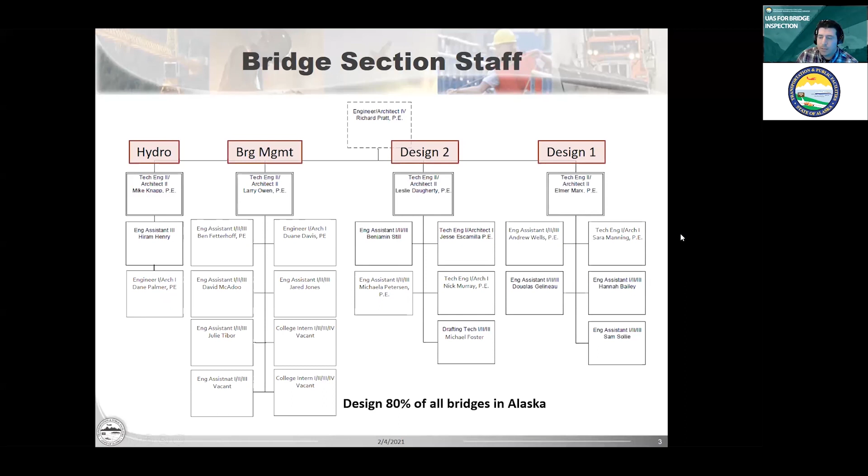Our staff of about 20 engineers is pretty diversified. We're broken into a couple of sections: 2 design squads, a bridge management squad, and a hydraulic squad. Although we are in squads in a sense, we do a lot of work sharing. For instance, our designers will also perform load ratings and inspections, and bridge management will also do designs. We have a lot of well-trained engineers in that sense. We consider ourselves a production office. We design roughly 80% of all bridges in Alaska, whether they're new bridges, rehabilitations, or preventative maintenance - 80% of those get pumped out of our office in the state.

So in the summer months, we do turn our inspection hats on. These are our routine inspection team leaders, and that goes all the way up to the top to our squad leaders and our chief bridge engineer. Each of us will have at least one routine inspection trip, which is pretty uncommon I think for chief bridge engineers to be out with a hammer banging on concrete bridges. It's something we all take pride in. In fact, we perform 100% of all routine bridge inspections in the state - it's handled through our office.

Segueing into fracture criticals, we have a lower number of team leaders, although all the routine inspection leaders are capable of doing it. For logistical reasons, we reduce those numbers, and we perform 90% of those as well in-house. We limit the rope access and specialty climbing ones, but anything we can access with a lift or under-bridge inspection truck is what we typically will inspect.

So let's look at our bridge inventory and our highway system. We don't have a lot of highway that covers a lot of our state, as you can imagine. A lot of it is non-redundant or critical - if we did, through an extreme event, lose a bridge, we would have detours that could be hundreds of miles, or potentially there would be no alternate route. Like on the Dalton Highway, there is only one road that goes in or out.

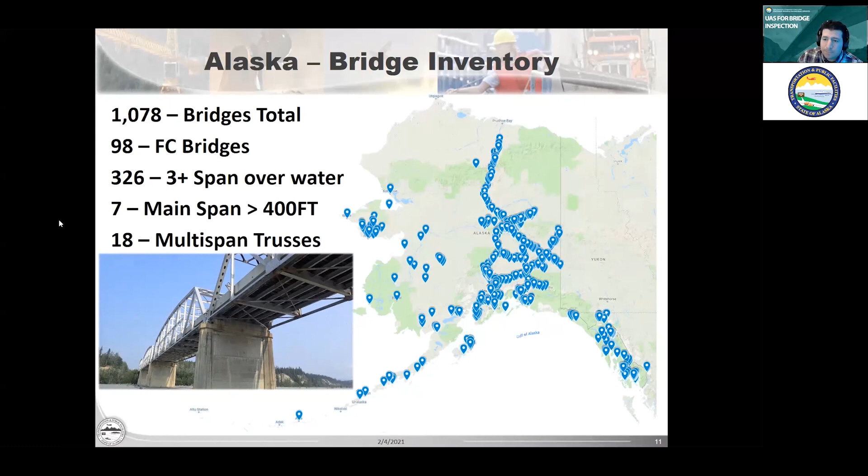So why are we looking at including unmanned aircraft into our inspections? Well, to supplement our routines, our in-depths, low waters, and fracture criticals. Obviously, they're not going to replace hands-on inspection, but we do look at other elements when we're in our trucks. So in that sense, maybe we can expedite our inspection trips.

We're one of few states that, on our routine inspections, don't typically lower underbridge inspection trucks. We perform routine inspections from the ground level with binoculars and spotting scopes to assess spans we don't have access to, using engineering judgment and what we can see visually. If we do have to see more, we flag it and get a special inspection to come through at some later point.

But you can imagine this can get complex on some of our longer span trusses or deck trusses where access is definitely very limited to just this slope that leads up to the first span.

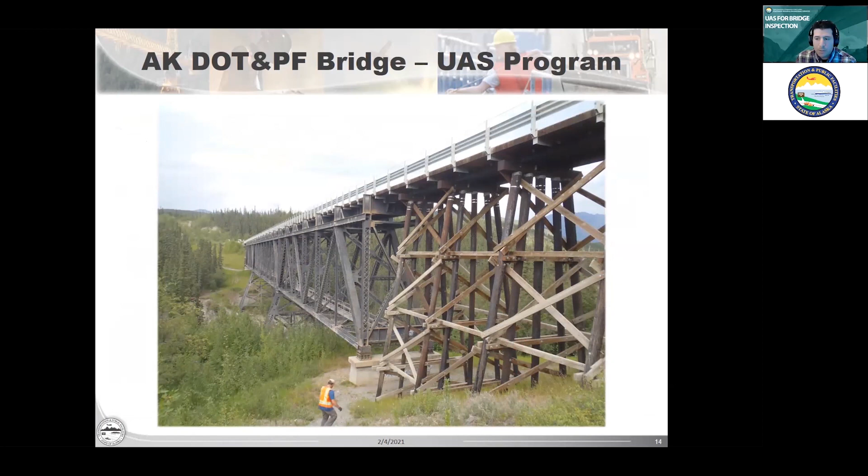Another reason we're looking at including aircraft is inspector safety. That affects me greatly. As you all know, being on a bridge deck with traffic adjacent to you isn't great. The more time I can spend off the bridge deck with variables we can't control, the better. So if we can inspect certain elements and not be on the bridge deck, I think that's a win-win.

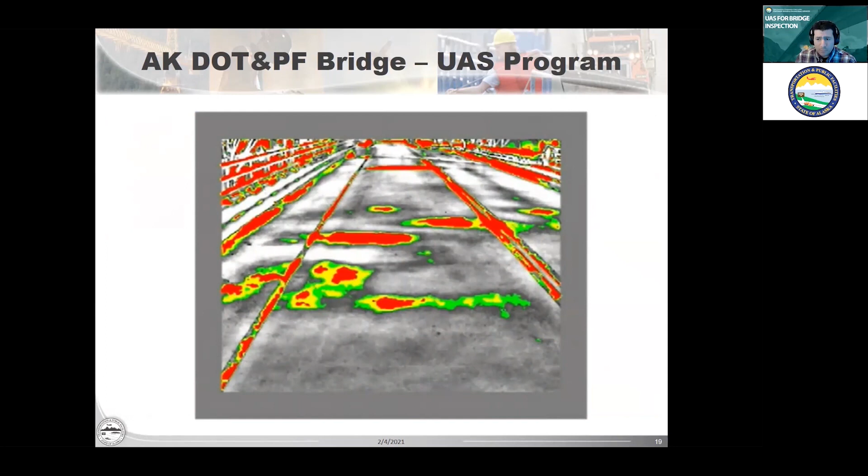Obviously, there's advancements in technology. Drone technology has increased rapidly. As tried and true as chain dragging is, it requires you to be on a bridge deck, chalking out and estimating areas of delaminations and spalls. But through thermal technology, we can now use drones with FLIR cameras to take pictures, images, and videos of areas like this. Whether it's full AI autonomous calculating the areas internally, or taking pictures into AutoCAD or MicroStation and measuring areas, there are obviously alternative ways to do this.

And we have had a slew of emergency inspections as of recently. I am going to make some changes in my settings for one second, I do have a video coming up.

But aside from obviously taking really cool aerial photos, what may we have potentially had to do, or what may we do with UAS if needed? Well, the bulk of our bridge inventory, our modern bridges, use steel pipe piles that are encased, concrete filled steel pipe piles.

Sorry, hard to get that out. We do that because they're really ductile, they allow a lot of movement in seismic situations. Imagine if this bridge was pushed on transversely, left and right. We get that ductility, great, but what we do at the top is stop our piles short from being embedded into the piers. As you can see in this photo, that top gap is about 3 inches.

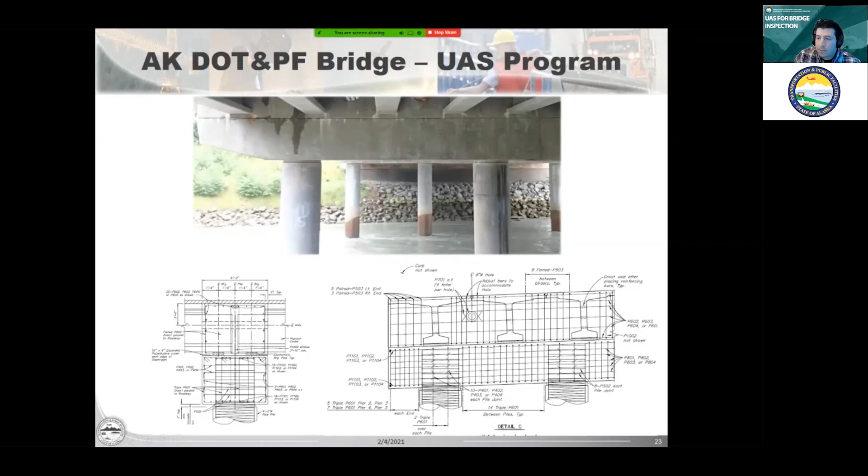We've also had a number of bridge strikes recently. Pay attention to the roadway down here as you'll see a bridge strike coming from webcam footage. So this was a dump truck that came in with its bed up, slamming into the side of the bridge. This is Dowling Road over the Seward Highway in Anchorage, and I'll play it one more time if you missed it. An impressive impact with that.

We had another event that happened on Artillery Road over the Glenn Highway. This is just north of Anchorage in Eagle River, where a truck carrying a Connex box got sardine canned and the top ripped off, damaging the girder. In both instances the girders had to be replaced, and traffic was diverted because of the unstable girder that could potentially have collapsed. So for inspecting, anything we can do to not be directly underneath what is unstable is an added benefit to us.

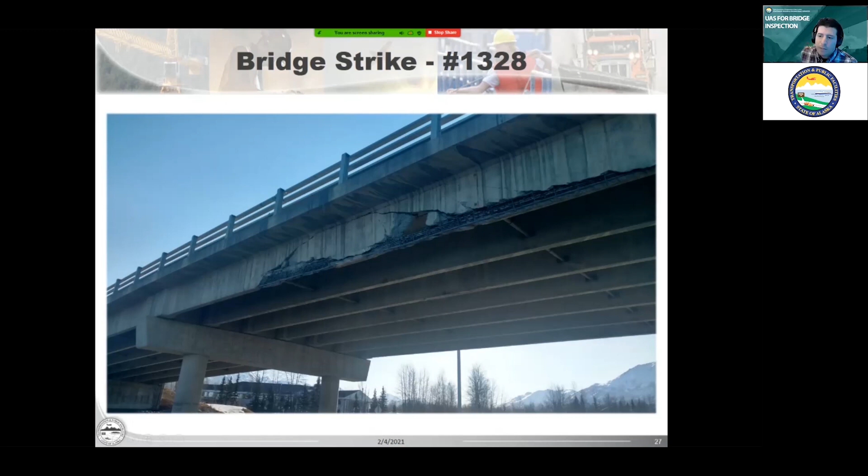So one more example of a bridge strike. This is a tall bridge, the Juneau-Douglas Bridge in Juneau, connecting Juneau on the near end and Douglas on the far end. And you're probably thinking, well, this is a tall bridge over water, what could possibly hit this, right? Well, I give you the ingenuity that is a crane on top of a barge, pushed by a tug.

That actually happened, and what's great is cell phone video coverage that pops up on Facebook is how we find out about events such as this. This was an excellent study.

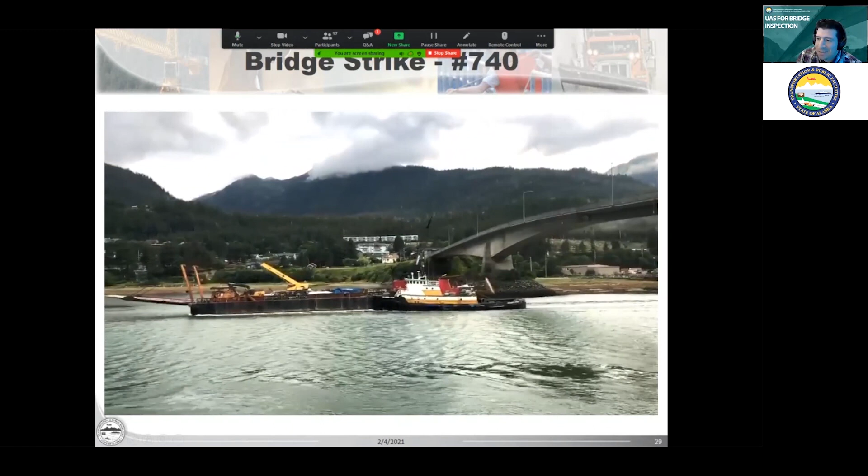This was a study for UAS inspecting because we had just started talking about implementing these into our inspection workflow, and this was while COVID was going on. This was actually one of the first times I saw coworkers in some time since we quarantined. So I was tasked the next day with investigating the damage and assessing it in a detailed manner. With our typical way using binoculars and spotting scopes, it's hard to get up and see where the damage location was, even at low tide.

We utilized our trade secret trick of GoPro on a stick to access and visually see the damage, which you can sort of see at the bottom here. But even then, our first attempt showed the damage, but it wasn't great. The GoPro was too wide angle of an image from this long overhang to actually get the visual.

It actually required a trip to Home Depot to get some rigid metal conduit to fashion into an L shape - a vertical leg and an elbow and a horizontal leg - then attaching the GoPro. So we've updated that refined technology, and it did give us the visual.

However, had we had an aircraft in our inventory, what took 4 hours would have been a quick deploy, take some images, and we're done. Because all I was after was an image like this that I could quantify the damage with, to ensure there were no bars exposed, no pre-stressing strands or ducts that were ruptured.

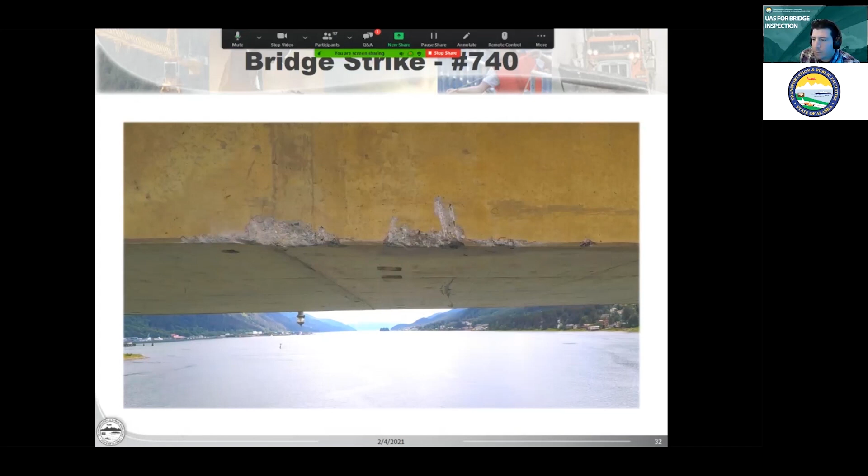So being able to visualize these from a safe distance is something that we'd really like to have in our inventory.

So where are we at in our UAS program? In April of 2020, just recently, we were awarded a $100,000 STIC grant. For our little bridge office that we maintain, that's enough to kickstart us. We've procured 2 Skydio platforms that I envision to be our workhorses - they're going to do the bulk of our flying for day-to-day inspections. We also have 1 DJI Matrice 300 with optical zoom, thermal sensors, and a spotlight for specialty inspections or nighttime inspections if need be.

3 of our inspectors who go on our inspection trips will shortly take their Part 107 exam. Mine is planned for next week, and 2 others very shortly. This summer in 2021, we're going to start implementing them on select bridges that we're assigned to - like that list I showed earlier, possibly longer span routine inspections, multi-span routines, or fracture critical aids.

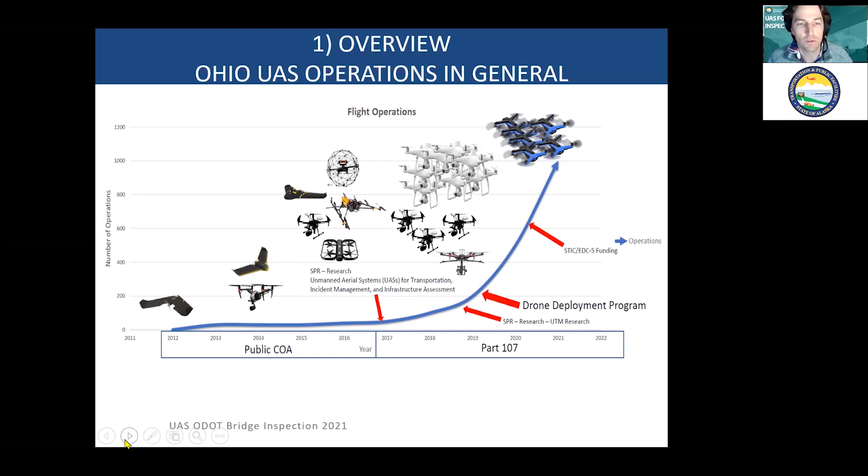In the bridge inspection world, once the Skydio 2s came out, we just used them. We like the Skydio 2s, we don't get paid to say that, it's just a drone that is working for us. And we expect the same type of curve with bridge inspection to take off with the Skydio 2s.

As background for Ohio bridges, we have a bunch of bridges. We are a home rule state, meaning the more local or regional you get, the more authority that local entity has. So we have different jurisdictions: state highways and interstates, the turnpike, our publicly elected county engineers, our professional engineers, our mayors. You can see how many cities we have with bridges, how many bridges total.

We have 45,000 structures that are considered bridges in the state of Ohio. Not all of those meet the definition of an NBIS structure; if you're looking for the bridges that meet the NBIS structure, it's this number, 28,596. So we have a lot of bridges, but let me drill down just for the state structures.

We have 12 districts, and we deem the bridge engineer of the district the responsible person, the responsible charge. The bridge inspection happens out of their shop, and there are 14,552 state bridges. Looking at boiling it down even more, we have an underbridge inspection truck—actually two underbridge inspection trucks—and that's an operation that's centralized.

We very simply divide the state in half. We have a northern U-bit and a southern U-bit. We call them snoopers, but they're technically Aspen aerials, and they do 400 bridges a year. That's the process we're trying to knit into our normal supplement to the snooper operation.

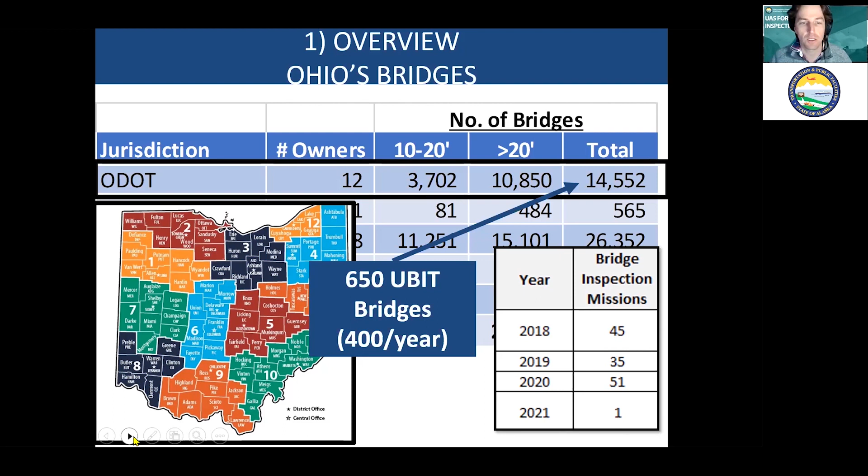We started using drones and bridge inspection for our major structures, and this is one of our big cable stays in Toledo. Where we see benefit right off the bat is, if we're going to rappel this tower and rappel out the cable stays, using a flying camera is a much safer way to do that.

We can get similar video. We might not be able to get a close-up of a crack indication or something very minute, but this could be the first envelope of inspection. A drone inspection could be the first envelope, and drone pilots get distracted - apparently this pilot was into boats. Okay, back on track now.

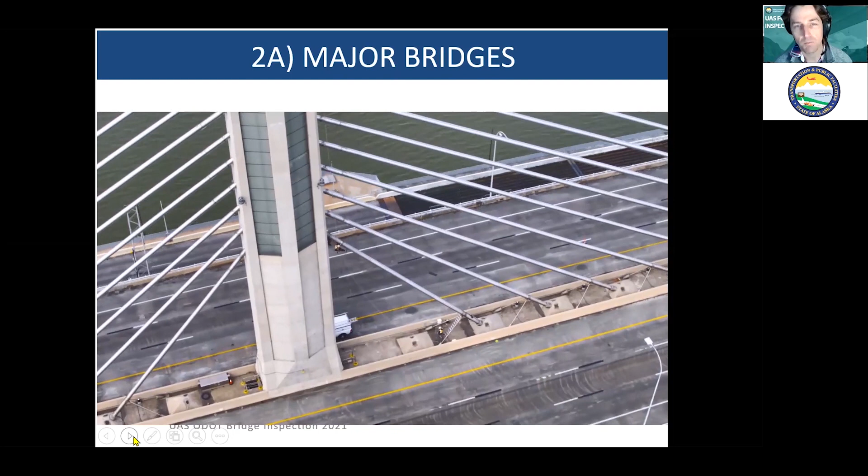You can see how dangerous this climbing can be. We anticipate using the drone instead of climbing every 5 years, perhaps using the drone to offset climbing to a 10-year cycle. More major bridge stuff.

This is a drone of our snooper. We have ongoing research with the University of Cincinnati on this structure in particular - it's the Jeremiah Morrow Bridge near Cincinnati. We want to get a set flight path that takes video or photo of every single square foot of this bridge, and it will automatically find crack width, crack length, and determine if there's growth or change over time. So we have ongoing research there with UC, and that's happening.

So that was kind of the major bridges - that's where we started with drones. Where we moved then into using drones more often as the reactive approach. We fortunately have 4 team leaders in our central office that run and manage our underbridge inspection truck operations.

Again, we do about 400 bridges every year. We schedule them ahead of time, and then we go implement the schedule. Well, when we show up to a bridge, often there's construction, or bad weather, or COVID. A global pandemic can take out a whole garage of traffic control. So when that happens, usually we just do the inspections from the ground.

But in 2020, instead of using the snooper, we were able to use the U-bit, or use the drone, and basically offset the snooper days. So we're reacting to our normal operation and finding value there with 39 inspections.

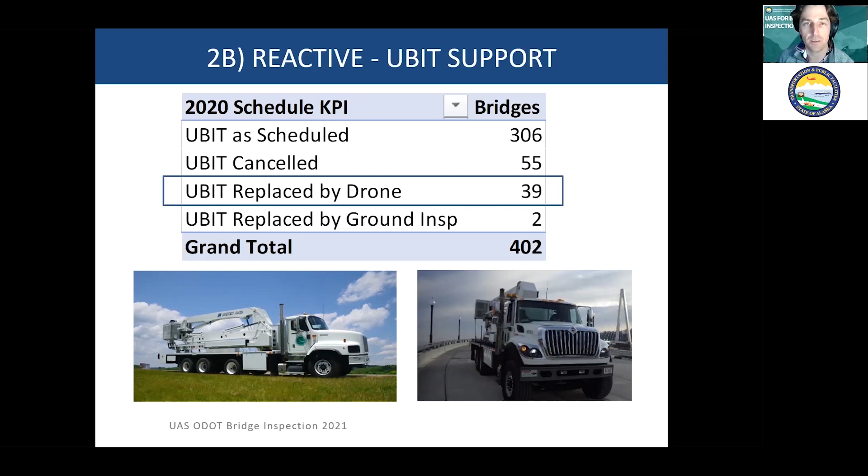Another value we found - we have some structures like this interstate ramp with the blue dashed line that has such super elevation and such high ADT that you can't close it. You just can't close it for one, and you can't put a snooper on it for two. No matter how hard we tried, we just could not snooper this bridge. So using the drone was really the only way we could get close up and look for those out-of-plane bending cracks, close up inspection for crushing.

Little closer than from the ground. Our general rule of thumb is if you can't get within 35 foot, you should probably put it on the snooper list, and you should schedule it every year, every 5 years, somewhere in between. But we're seeing that we could do that with the drone - we could use the same policy with the drone. 35-foot sight distance could apply to a drone as well.

So another success story we had - Kentucky found some indications, some fatigue cracks on their approach spans, and we wanted to look at the same detail on the Ohio approach spans, but we could not get a snooper in there because of construction.

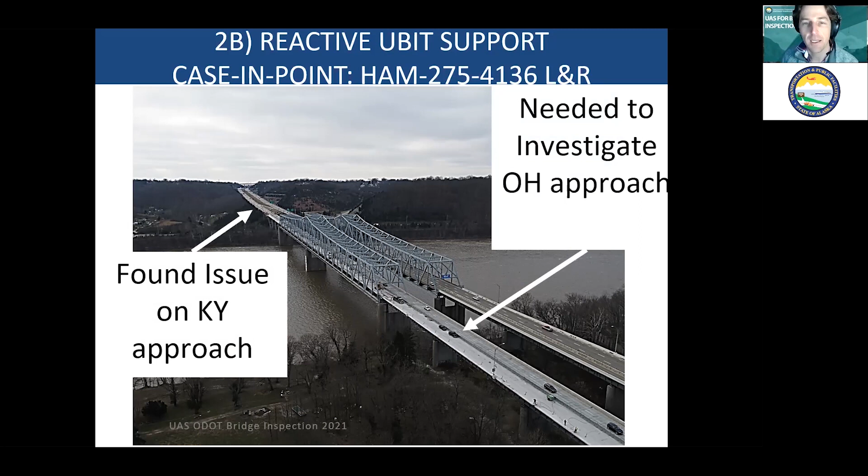It was interstate, and fortunately we were able to bring the drone in, and it was able to zoom into those cope holes and do an inspection for fatigue cracks. We could get close enough to inspect for fatigue cracks. So another win for the drone.

Once we had the three wins I just shared with you, I was convinced there was a spot for drones. So once we did that, we started asking inspectors if they'd be interested in being pilots. We have two central office employees that are pilots who run our snooper operation.

Another example of an interstate bridge that was canceled is this one. Notice that there are a number of interior spans that you simply can't get into from the ground. Using the drone was very helpful because the alternative is just kind of a sorry inspection. Here are the pilots. The drone was able to get to this seated hinge, a number of spans away from the bank, and do an up close inspection.

A benefit there. Another place we reacted was we got a phone call from our permits office. They said we had a super load drive on this bridge, off permit, and they heard a popping sound. Can you send the snooper truck and do an inspection for fatigue cracks, buckling, bearing movement? And we had the question - if a super load caused popping, our snooper truck is pretty heavy. It's a permit vehicle. It doesn't make sense to put a heavy snooper truck on a bridge that might be buckled. So it's another win for the drone.

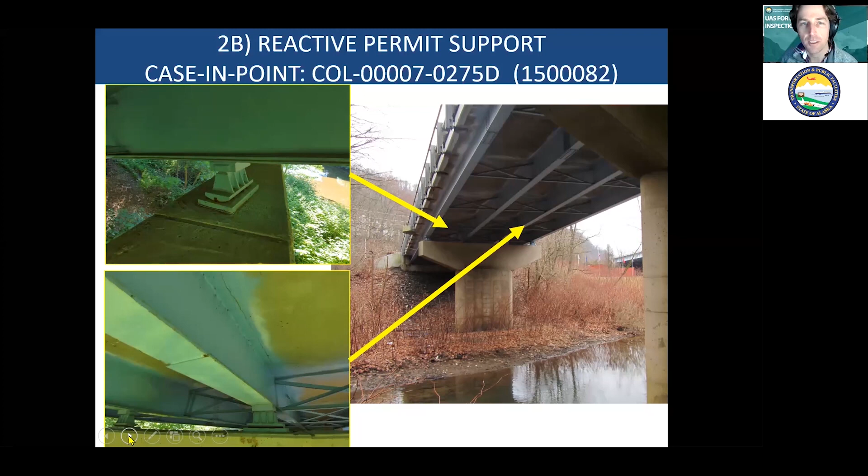We were able to fly the drone in and around, even in between the beams up close to the deck, to look for fatigue cracks on those fatigue prone details and inspect all the bearings. There weren't any fatigue cracks or buckling on the bridge. Another win.

We're trying to be proactive with the drones, so we added a drone inventory field, yes or no, with a frequency and an inspection date. We're attempting to be proactive. We're not quite there yet.

Some places we are currently proactive is with known issues. The snooper has found issues, corrosion holes like this. Instead of using the snooper every year, we can use the snooper every third year or every fifth year. And in the intermediate years, we can fly the drone up to a known issue and see if there's any change. So that's one way we're being proactive.

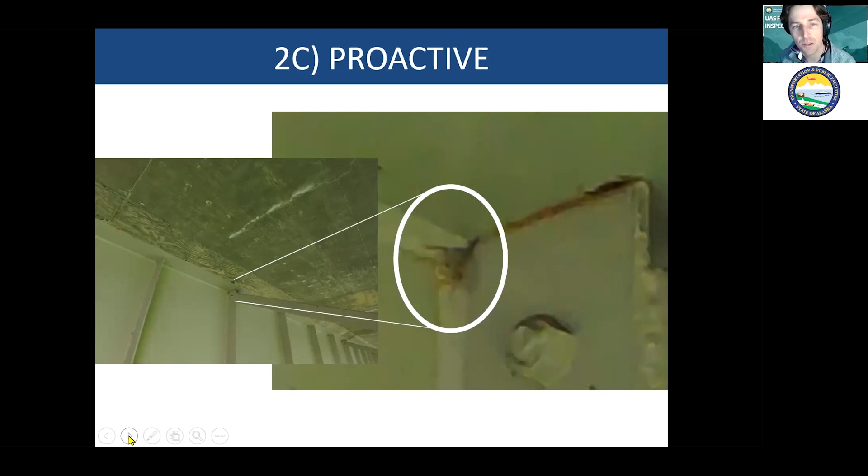Another way, similar to the section loss I just showed on the last slide, is fatigue cracking. We have a fatigue crack here, or an out-of-plane bending crack, that we found during a normal inspection with the snooper. We can follow up to that known problem area with the drone and see if there's any change, any growth. So we're trying to be more proactive.

We found with project scoping benefit, the drone will go up and do photogrammetry and determine how long the approach slab bumps are and determine what type of project we should do for big, long projects. We can also get close on bearings, replace or rehab, and we can look at structural steel section loss and or cracking for scoping.

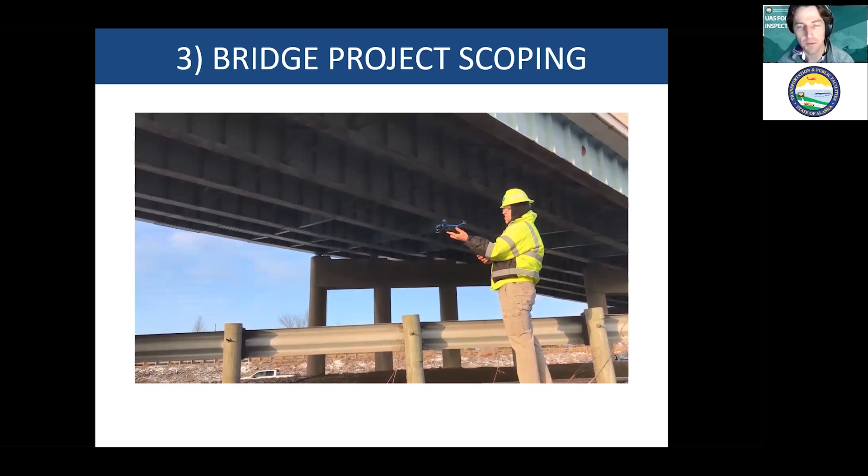I'm going to show a video. This is Dan, one of the two bridge snooper operators, team leaders, flying the Skydio 2. Notice he's holding the Skydio, turning it on, and flying it up to the pier. We're going to be pretty close to traffic here.

Some of you might cringe, but what we're looking for - Dan was charged with looking at the forward and rear face of each bearing. I think there were 6 or 7 beams and 6 or 7 piers. He flew the Skydio 2 on the forward face and took a photo of every single bearing. There it is, and it didn't move. You really can't crash these things.

And then he did a photo on the rear face of every bearing. Super cold this day - this was just a couple weeks ago. And it just took two batteries to do it.

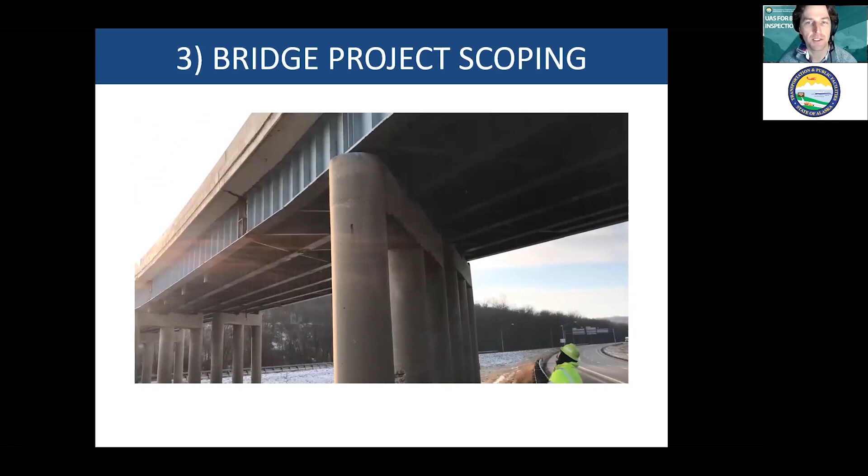Yes, we could have done a ladder. We couldn't have done a bucket truck, and we didn't want to do a snooper truck. This was the best method for doing it. He was done in less than 30 minutes taking photos, and then processing the photos took another hour and a half or so, organizing the photos. But it gave us what we wanted.

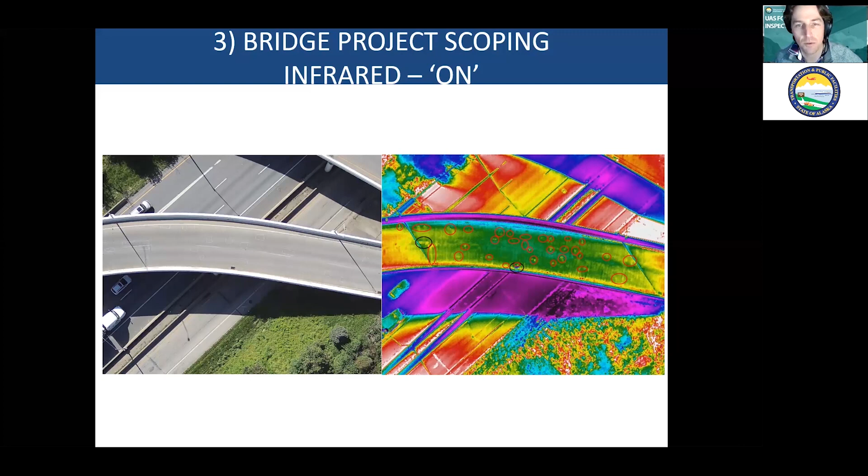Infrared, I'm not a big fan of infrared yet. We haven't seen a huge benefit. Where we have seen benefit is where we close down traffic and spray paint the wearing surface, then do a drone imagery on top and measure them all together. You can see some of the spray paint squares in the left-hand image. Infrared, not a big fan of infrared on or infrared under. It's not really telling me anything yet that you can't see visually. So you can see a lot of the issues visually.

We used a drone to make a 3D imagery of the super span culvert, corrugated metal pipe, to see how much corrosion we have through the pipe. That was kind of cool. I'll skip through some of this, but we have found benefit where we're looking for workmanship issues.

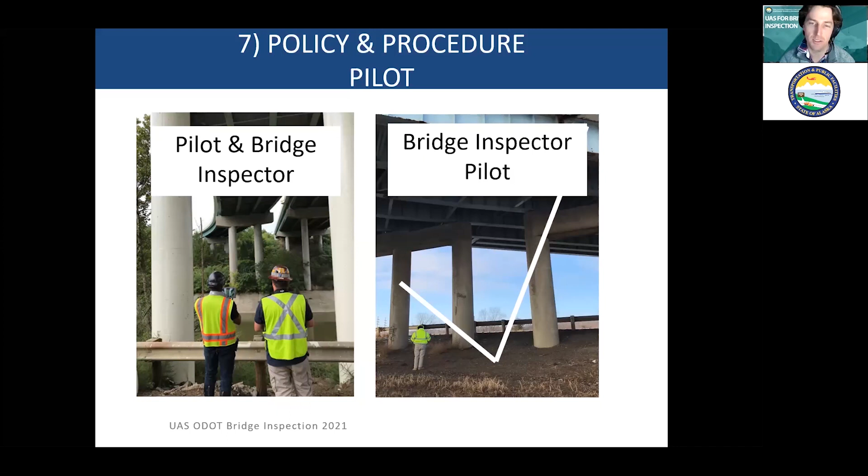Probably the biggest benefit, or the biggest turn for us, was instead of going from a two-person pilot and bridge inspector operation, which was what we have on the left, we have the bridge inspector on the left and the pilot on the right. What we found was, and this is very simple, and we overlooked it, I overlooked it, the inspector would tell the pilot, go ahead and fly to cross frame 4, it's bay 3, span 2. They would look at the inspector and say, what? What's a cross frame? So there was so much of that happening that you'd lose your battery life. You'd have 15 minutes of battery. So that was enough of an obstacle for us to just train a bridge inspector to be a pilot under the Part 107 rules. Instead of the pilot being trained to be a bridge inspector, it was just simpler to go the other way. So once we did that, we found great value.

A couple of other things, we use Skyward. I highly recommend Skyward. It makes planning the operation very simple. There's a built-in risk assessment, about 45, 50 check boxes where you go yes, no, yes, no. For example, have you flown within the last 30 days? If the answer is no, you're a higher risk as a pilot. So we've made all these risk assessments for the pilot to easily plan their operation.

Recommend that. And I mentioned that we went from the pilot inspector business model to just the inspector being the pilot business model. There's an onboarding that has to happen. Once somebody passes the Part 107, we know they are legit. We know that they're interested.

So then we give them 2 days of training at the UAS Center, and then they have 3 hours minimum using the Phantom 4 Pro, which is a little more of a twitchy, more difficult drone to fly. And then they have 10 hours of solo time, and then they need to record flights every 30 days in order to keep their drone.

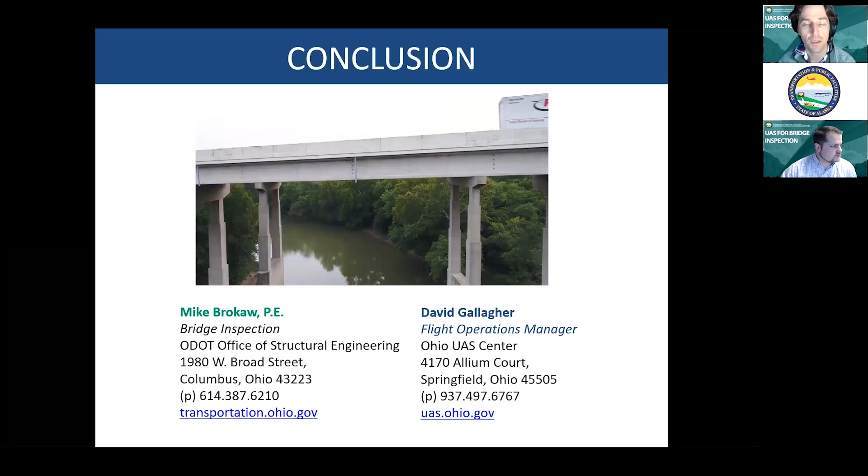I think if you find a place where you can knit drone usage into your current operation, find something that's working and knit it into that operation, then do so. We are knitting it into our snooper operation, as I mentioned, and I don't get paid by Skydio, but once we got the Skydio 2s, I knew we found the right drone, and we used that for bridge inspection to get in close, tight corners.

Lastly, my contact there is in the bottom left, and Dave's contact is in the bottom right. He's with our UAS Center. He's more in-depth with the policy procedures on the UAS specific information, and I am in the bridge inspection structural engineering world. With that, I am going to stop my share.

Thank you, Michael. Hey, I have one question for you, and it got upvoted as well from Richard. Is FHWA on board with substituting snooper inspections with UAS inspections? Yes. Perfect.

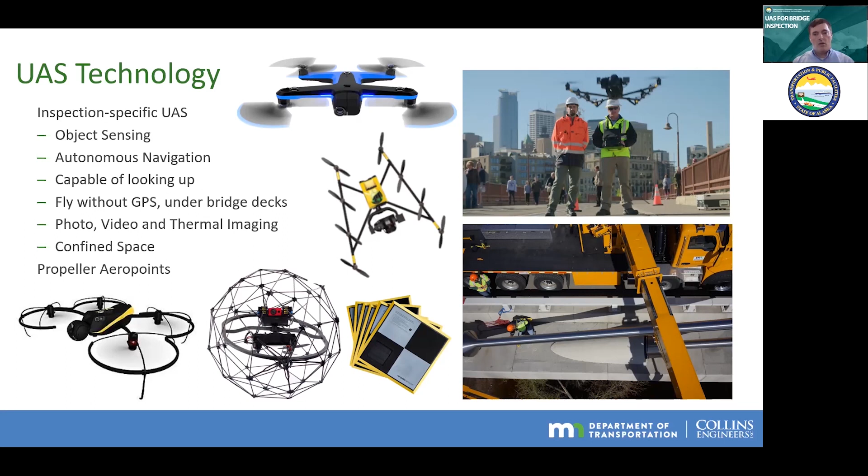Sometimes we want to do confined space inspections, so as you can see in the image there's a collision tolerant drone, the Flyability Elios, which is really specialized for doing those types of inspections. And then in the bottom right, there are targets - those are Propeller AeroPoints targets, and we use those to geolocate our models so that they're survey quality or close to survey quality.

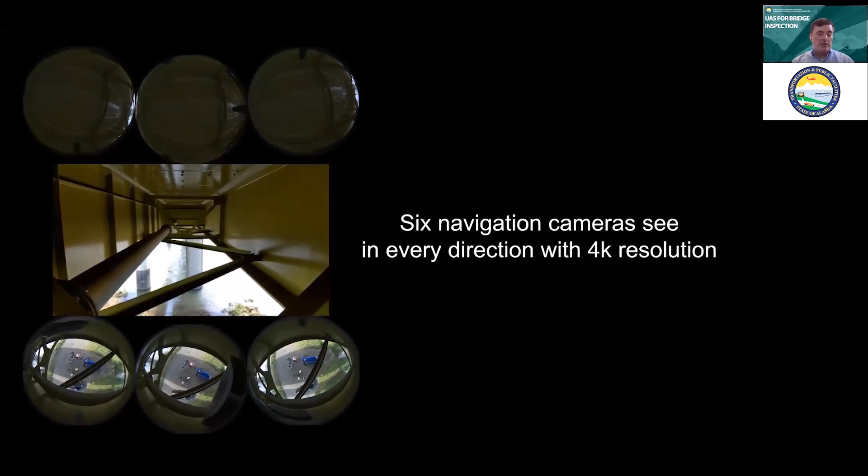So Mike talked about the Skydio 2, and so did Jesse, and we're using it quite a bit. We really like the obstacle avoidance, and we're also able to get into really tight spaces. It has the 6 4K navigation cameras, so it's using AI to avoid obstacles. I won't say it's crash proof, but we haven't crashed it, and we've put it in some really difficult areas, and it's performed pretty amazingly. Here we're flying between beams of a bridge, and that's very difficult to do with any other drone, with the exception of maybe a collision tolerant drone.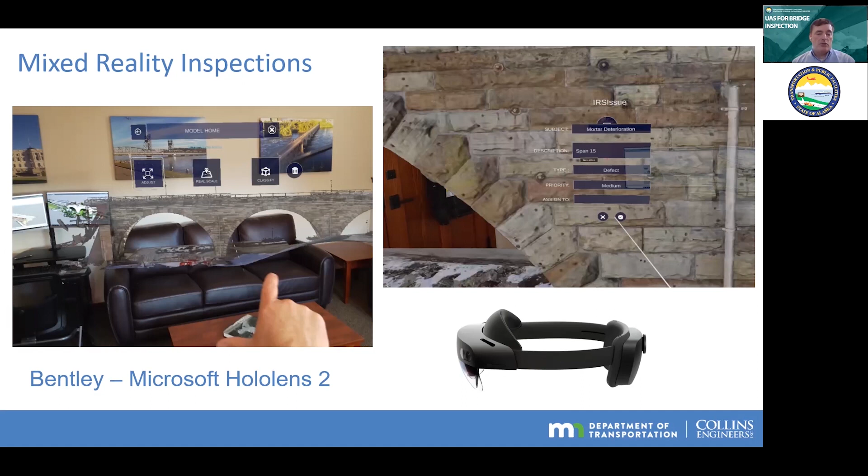Some of the other technology we're using is pretty futuristic, but it's something we're able to do now. We can do mixed reality inspections using the Microsoft HoloLens 2. We've been working with Bentley, and we create these 3D models and put them into the HoloLens and do a virtual inspection. So you can do an inspection like you would in the field, but you're in your office, and we can add defects and measurements right in the HoloLens.

This is what it looks like if you're wearing the HoloLens, and you're seeing a holographic version of the bridge. The video doesn't really do it justice, but you can see how it works. We have little menus that float up in the air, and we use our hands to navigate the menus and navigate the bridge.

We can move around, teleport to different areas of the bridge, and then add our defects and elements. This is specifically being built for bridge inspection, not just software we're adapting to it, and we'll be able to take the data from these virtual or mixed reality inspections and import it directly into our bridge database as elements, quantities, and conditions.

One of the other important things we're able to use now is artificial intelligence to find cracks, specifically in concrete. This software is by Fujifilm, and we fly the bridge. The software stitches all the images together, and we're able to create a model, and then the AI finds all the cracks in the deck. We can download all those cracks into a spreadsheet and quantify and classify them. It's a pretty powerful way to analyze your deck.

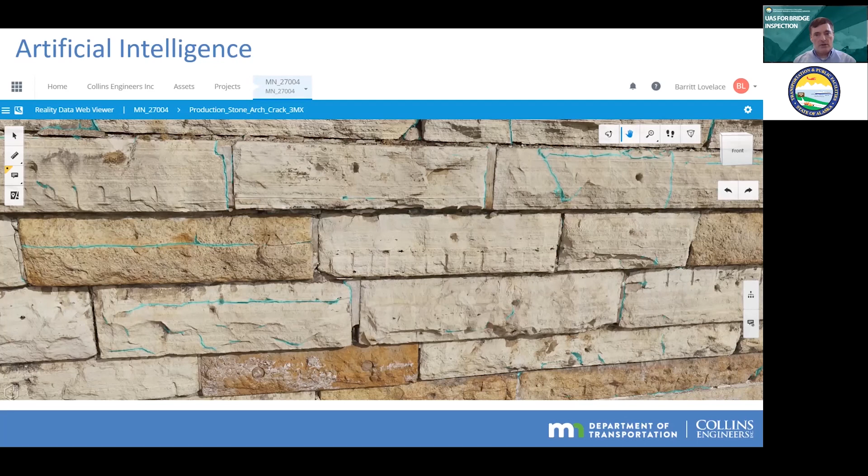We can use infrared, as Mike mentioned. It is difficult to rely on it, but it is a tool we can use and is available on a lot of drones.

So when we create these 3D models, they're cool, but they really do serve a purpose. One of the purposes is to be able to extract element and defect information out of them. The models are dimensionally very accurate, usually sub-centimeter quality, so we can measure all of our defects and elements, and then import that information into our bridge inspection database or report.

The next thing I'm going to do is talk about a case study and try to tie everything together on how we use UAS. In this case, we're using it for a bridge rehabilitation project. This is the Stone Arch Bridge, located downtown Minneapolis. It's a 22-span masonry arch bridge. It used to be a railroad bridge for James J. Hill, but now it's a pedestrian bridge, and we're currently in the middle of a rehab project for the bridge.

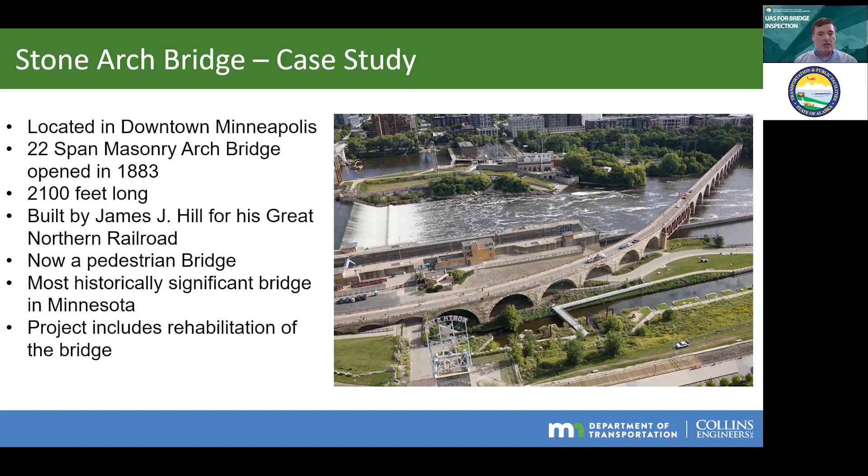The workflow for using UAS on a rehab project: first we go out in the field and collect data on the bridge, mainly in the form of images and ground control points. We create a digital twin or reality model of the bridge, in this case using ContextCapture. We do a field inspection using the model as part of that process, and we can also use the modeling as part of design and plan preparation. Eventually we also supply the contractor with the model so they can use it for their purposes as well.

The first thing we do is plan our flight missions. In this case we're using the Intel drone and Intel Mission Control software. We pull in a previous model of the bridge and plan everything in 3 dimensions. I can't remember exactly how many flights, but the whole thing consists of about 7,000 42-megapixel images. It took us about 3 days to collect all this, so it's a lot of data, but you collect it really quickly in the field.

This is what it looks like when the drone is flying in the field collecting images. It does just like a lawnmower pattern. It's all autonomous, so the only thing we really need to do is take off, push play, and it collects the images. It'll collect almost 400 images per set of batteries.

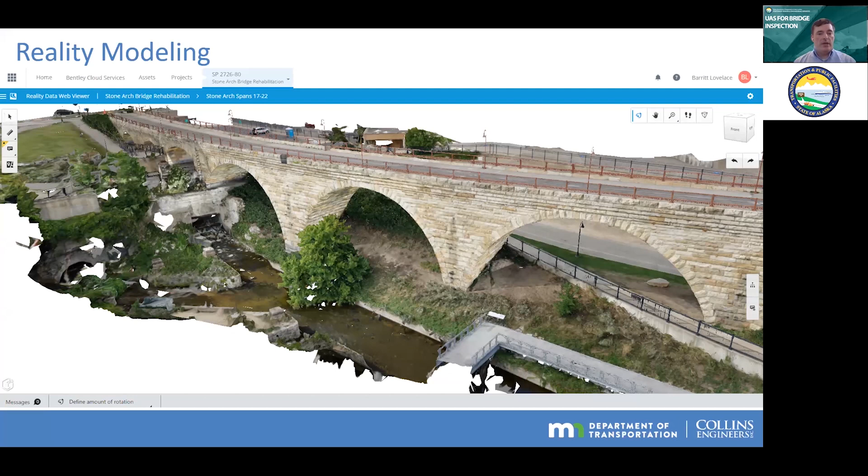Then we take all those images and the ground control points we collected, and we process them into a reality model or digital twin. This is what a small portion of the bridge looks like. It's all tiled, so the closer or more you zoom in, the more detail you get on the bridge.

Our inspectors in the field had tablets with access to these models through ProjectWise on the cloud. So instead of using pencil and paper to record all the defects and deficiencies, they recorded them directly on the model. The benefit is that all you have to worry about is your actual inspection notes, not locating those defects, which is really difficult to do accurately if you've done a lot of inspection, like locating cracks in stones. This takes that out of the equation.

Then we can import it into CAD and manipulate it that way. We can pull those inspection notes right into CAD and then start preparing either our inspection reports or our repair plans.

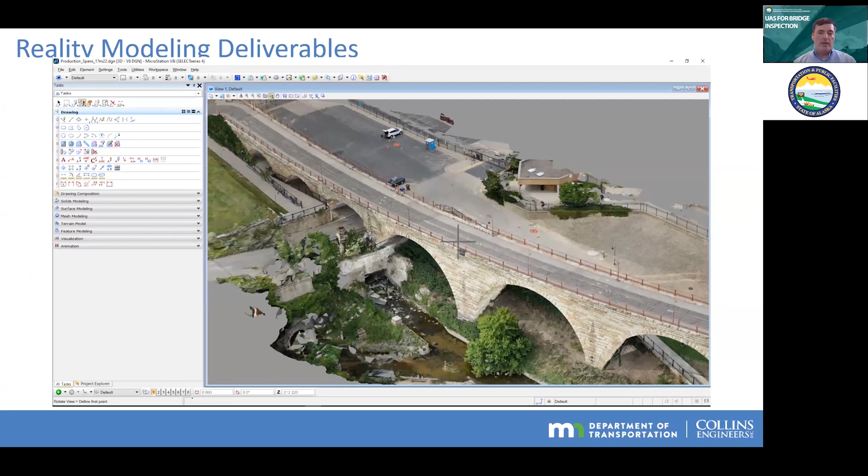One unique thing about this project is that the Army Corps of Engineers drew the river down. This is the Mississippi River, and there's a lock just upstream and downstream. They drew the river down to inspect their own facilities, so we took advantage of that to refly that portion of the bridge and collect data, because we wanted to capture the portions of the bridge that are normally underwater. We were able to do that, and it became a bit of a tourist attraction too, being able to walk out onto the riverbed.

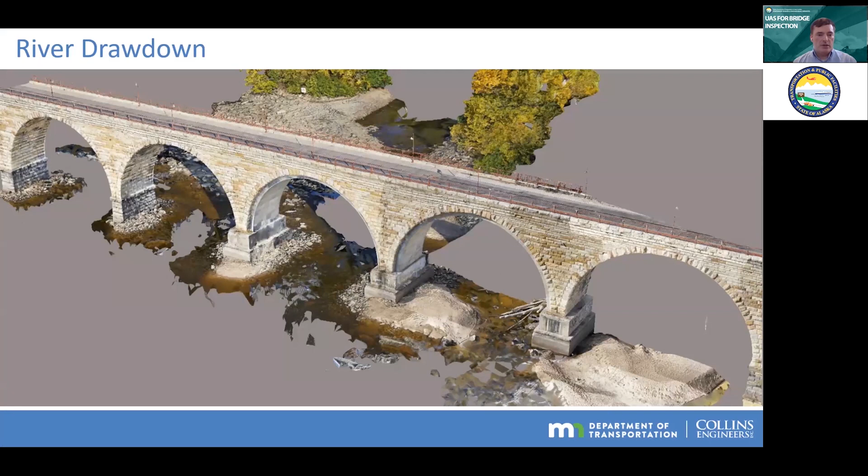This is what the model looks like after we've flown it, and you can see all the portions that are normally underwater. If we zoom in, you can see the amount of detail we get in these models. It almost looks like a picture, but that's actually the 3D model. We can see the exposed rebar and measure it, and we can always reference the actual photos tied to this as well.

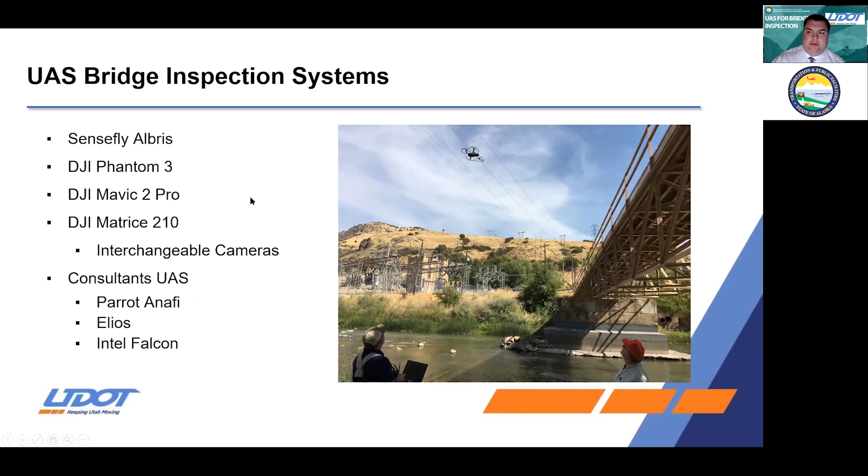Looking into the actual bridge inspections themselves, I know when I first started thinking about UAS bridge inspection, the superstructure and the high structure components really came to mind, to help you get to those spots where you just can't visually inspect without an under bridge inspection crane, rope access, or some other special access that requires traffic controls, causing a slowdown for the traveling public and safety concerns. So using drones for situations like that is really a great idea.

We selected it to try out with UAS, and as you can see in the right picture, we were able to get over the river next to the hillside and get a good look at some of the deterioration on the beam ends, the delamination and pending spall on the top of the pier cap. We were able to look at each of the pier caps and really get a good look at the beam ends, and even under the bridge over the water, getting a good look at the pier caps and all the bearings. This wasn't necessarily a signature bridge, but it's a really good example of where UAS excels.

Going into the policy side for the deck specifically, this is a pretty new change in our policy: we now give inspectors the option to stay off the deck in certain situations, like if there's more than 3 lanes of travel, narrow shoulders, depending on speed, or a high ADT - again focusing on safety while getting the opportunity for better quality data.

We're also asking our inspection team to map any bridge deck with an NBI 5 rating or less. This is to get information to our planning and design engineers, with the hope that if we get 2 or even 3 cycles side by side, we can map out where changes and deterioration are happening, how fast it's happening, and get an idea of when we need a rehab project or whatever's coming next.

Our goal is to expand that even further, even to some of our good condition decks, to get that side-by-side comparison and help with our deterioration modeling - getting a good idea of how fast our decks are deteriorating and where, all feeding back into better data for our inspection report.

A quick overview of the inspection workflow we're rolling out. First, the team lead or assigned designee reviews their assigned bridges to see if a UAS is a possible tool. Before they're out at the bridge site, they need to obtain internal UDOT approval and approval from other stakeholders as needed.

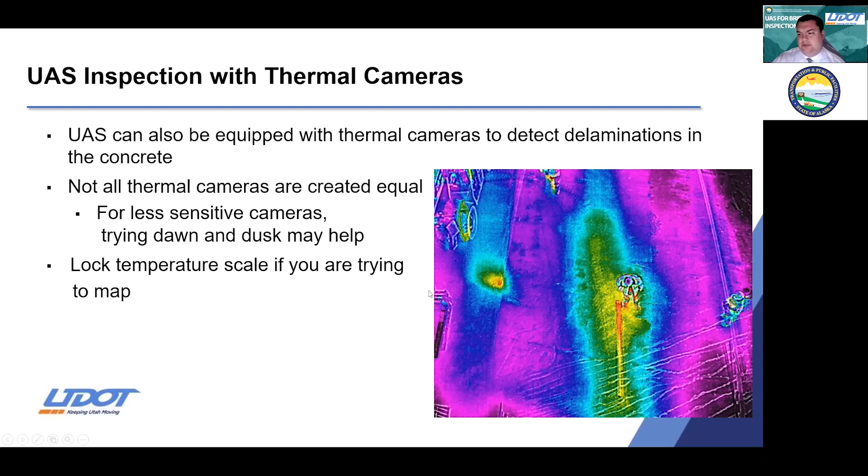And then there are these few hot spots, and that's actually one of our inspectors out there verifying if it's a delam, and we did find a delam there. It's actually one that I'm not sure we'd find sounding, just because the change in sound from being on top of the beam to the bay was also playing with it. So it is really hard to interpret, but I do think it can tell you something, but it is also not a silver bullet in all cases.

So doing a quick summary of what we've seen so far. Once again, deck mapping we think is a good place to start. We're leaning towards having multiple specialized UAS systems instead of one jack of all trades that covers all the areas we need. And it kind of also ties into the next bullet point that was mentioned previously.

The inspectors are definitely aware of how expensive the UAS system is, and they're definitely more hesitant to fly the more expensive ones for fear of crashing them. As they get used to it and more comfortable with it, that does go down, but there is that in the back of their minds all the time.

We do think we're having the opportunity to increase safety and data quality. One important thing to note as you're trying to go in and plan it, and that we're still working on and trying to get better on, is plan where you're going to store all the extra data and photos, and how are you going to tie that and get that data into a useful format for your engineers later.

It's a lot of data. We're using the Google Cloud right now to store a lot of it, but it is a lot of data, a lot of photos, a lot of videos. And then we have an internal approval process that we've gone through and kind of streamlined for bridge inspections, which has been helpful.

Near-term goals, again, flying over traffic with the new FAA ruling is going to be huge for bridge inspection. It's really going to help us out. Using machine learning to identify cracks and spalls.

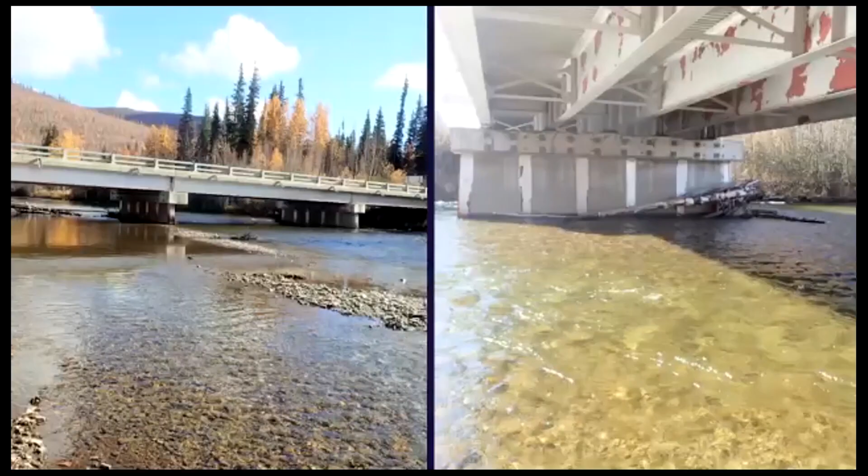And we'll hold on question three for a little bit. We'll let those populate, because question number three requires some photos for production to bring up. So maybe they can go ahead and bring those up right now so that we can see those as I read aloud question number three. So we bridge inspectors have been in these NHI courses before, so I get to play NHI course instructor here.

With these photos that you see, assuming you're inspecting a multiple span structure crossing swift but clear water, do you think a drone-based observation would give you enough information to sufficiently inspect substructure elements, abutments and piers to mudline, sort of elongating or canceling the need to perform an underwater inspection with a diver? So if you're not able to physically get there to probe for safety reasons, but the water's clear enough and you can take images from above, does that help alleviate that? You can check the box, if you will. Love to see your answers.

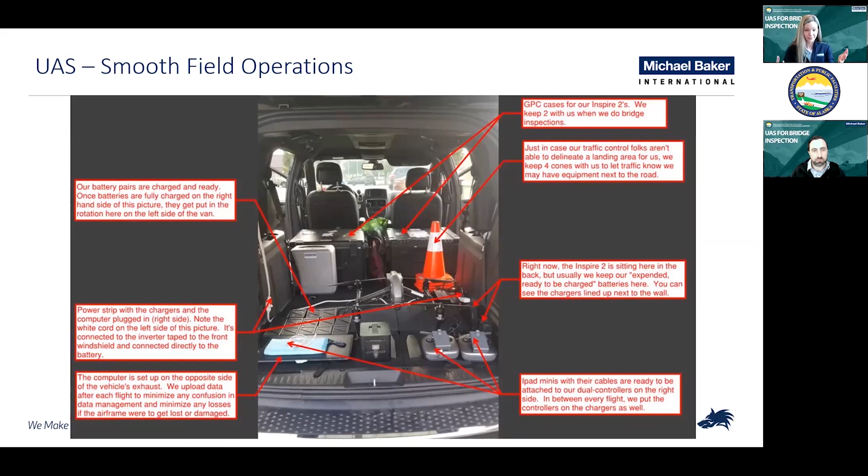And then this is another one, a lesson learned here. You can see there's a chalk line on the screen. We oftentimes run into magnetic interference whenever we're out on a structure with certain airframes that we use. If you have railings, metal railings or anything like that, you'll get a compass error, and you don't want a compass error when you're flying, because then the UAS becomes confused and unpredictable, which we don't like. So if you find a good spot, mark it out, take off and land from there. Like I said, we've got the inverter on the front, kind of tucked in behind our pilot there, but that's how we set up our vehicles.

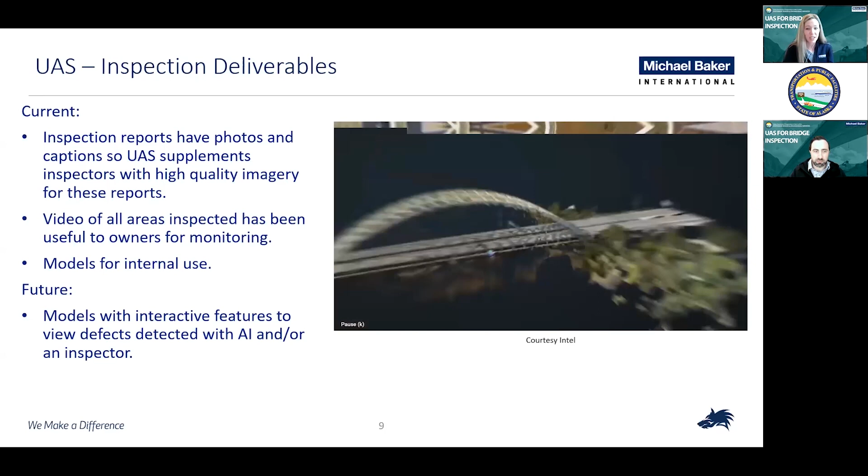I know a lot of the other presentations are talking about deliverables and what we're actually collecting while we're out there. Currently, what you have to deliver to the client has to go into the inspection report, that's where we're at. So every photo or video you take, you have to be able to take a representative image and put that in the report. As backup data, we use video for all of our inspections, so we have full coverage and full documentation.

So if we come across something, the next inspection cycle, we could go back and look at that if we needed to. And we can deliver that on external hard drives, things like that. People aren't really, or most clients aren't really set up to handle models right now.

So we use those internally and for our larger structures. Some of the smaller routine stuff, we're not going to model that, just use it as a tool in the toolbox for those inspectors out on site.

Out in the future, I know we've seen a lot of these models and AI and things like that. It's definitely out there, we're headed that direction. It would be so great if everybody could have a model of every bridge and just zoom in and out and see all the different defects, but the infrastructure isn't there to host that yet.

Right now we're on inspection reports, but I look forward to the day that we can use some of that more advanced technology. From here, I'll hand it over to John Zuliger to talk about some project examples and case studies that we've had over the past few years.

Thanks, Alicia. Can you hear me okay, guys? All right, yes we can. Great.

So as Alicia mentioned, there's a lot of advantages to having this tool in the toolbox, and being on the rope access team, climbing is pretty arduous for a full day, a week. That adds up, so this has been really helpful for us.

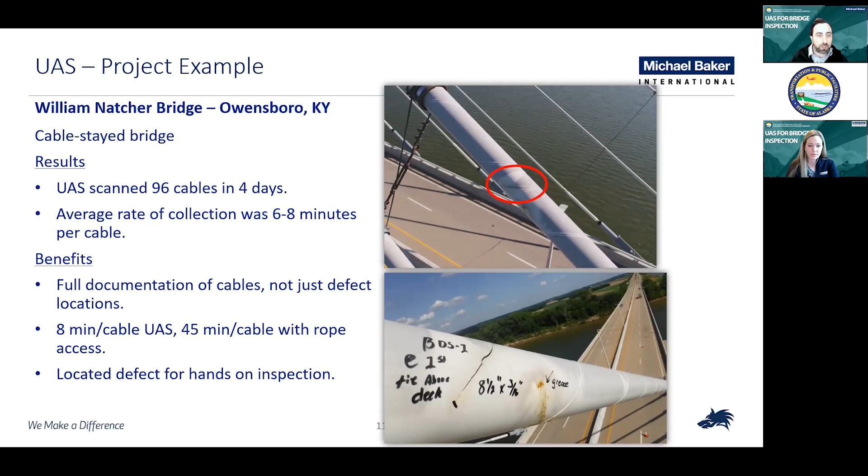And this was a great collaboration with ODOT District 9, where previous cycles had involved rappelling cables. I think it took about 9 or 10 days, which is pretty consistent with what we saw on Natcher there. But we also did Harsha in 2019.

And so with this one, it was a great example to be able to scan all of the cables 100% while the snooper was doing the underside fracture critical work. And then we had another small rope access team for anything else we needed to pick up along the way. So we cut this down from almost 9 days to 4 days with the UAS.

And again, that man-at-risk hour savings is really beneficial. And then you get full documentation of all of this data for the life cycle analysis and health monitoring of the bridge over time, which we found really, really helpful when you're considering making maintenance decisions. Next slide.

This was a little bit of a different one. It wasn't quite an NBIS inspection, but a rehab project where initially we considered 14 to 15 days of climbing on the bridge. We needed to look at fatigue-prone details to be retrofitted, but mainly we needed to look at the gusset plates for cable replacement on the Sherman-Minton Bridge. That was able to be cut down almost by 60%, where we were able to do this in 6 or 7 days versus the 14 to 15 days, because all we needed to assess was whether the gussets were in good enough condition to be able to reattach to.

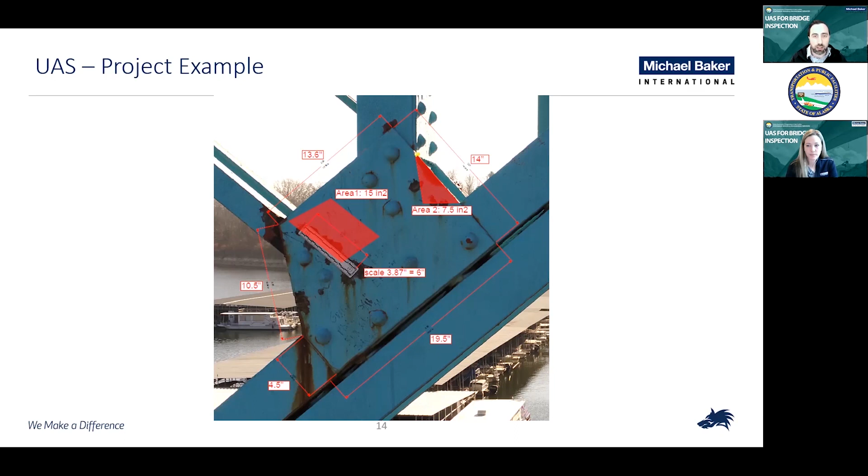Not specifically. This video in particular, we were a little late in the day. We needed to get the other mapping done, and it was a little too warm already. But like you said, another tool in the toolbox, and in the right atmospheric conditions, hopefully we get some good results.

For this, back up to Alaska here, our inspectors were doing some oil and gas bridges, and they needed to get out there with rope access, but to access in that method you have to use beam clamps and aid climbing, and it gets really tedious. So they were also able to use UAS to get the outside of the girders to help cut down some of that work, get up in between, really another efficiency tool, and able to perform this in very cold climates.

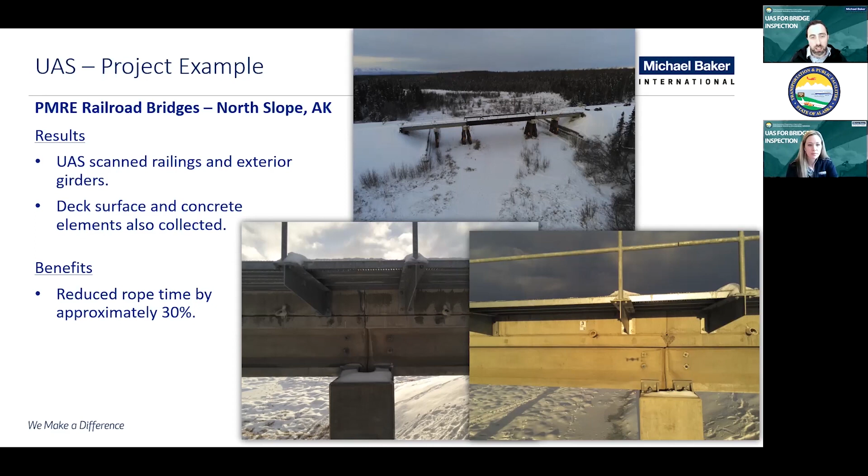Next slide, I'll turn it back over to Alicia to talk about some of our research projects.

Recently we collaborated with PennDOT on a project to determine which UAS would be most suitable for bridge inspections. We tested 6 different airframes, all of which were part of our large fleet. Before this project, we did not have a Skydio and weren't overly familiar with the Anafi, so we called Skydio and thankfully they shipped us one quickly, allowing us to use and test it as part of this project.

We tested it on concrete, steel, showing how versatile they could be for complex inspections on connections and cables. You can see some of that in action here. Imagine being out in the field with 6 airframes between 1 to 2 vehicles, so there was a lot of battery switching and things like that, but the project went very, very well.

I have a couple of videos here. This was for the night flights. They wanted to see a simulated pier strike emergency response scenario. In this one, you're looking over my shoulder, I've got the iPad, I think this is the Phantom 4, and in the far part of the screen you can see it illuminated.

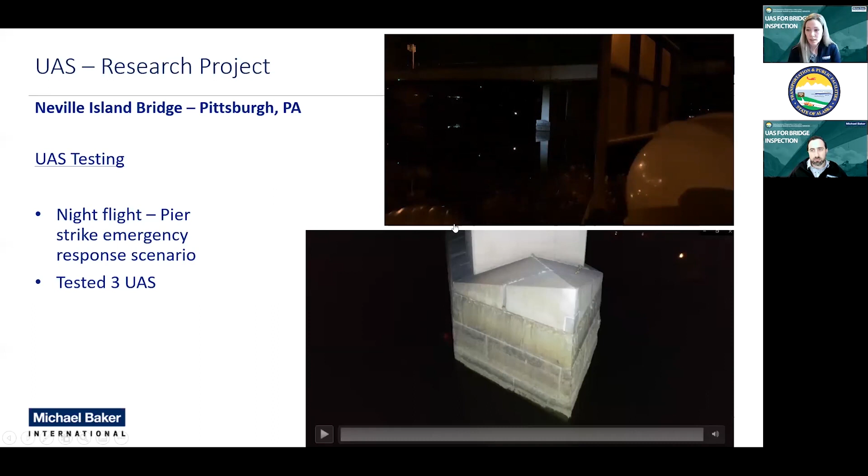Down here at the bottom, this is what the UAS recorded. Really great footage, really clear. I feel like if we needed to see something in that emergency scenario, we'd be able to with this. Also, one item of note, there were fishermen probably 100 feet away at the end of the pier.

One of the other bridges we did, this was originally where we wanted to start, the Fort Pitt Bridge, but we ended up splitting it between the two locations. So the last half of the week we were out at the Fort Pitt Bridge. This is where the Skydio actually really started to shine for us.

They were doing some rehab on the Fort Pitt Bridge with a lot of cables, and obstacle avoidance doesn't work on very slender items like power lines and ropes and things like that, so we weren't going to push our luck.

I saw one of the questions earlier asking if we did the Enterprise edition where you get the software package that lets you fly a little closer. Yes, we did that here, and for our purchased Skydios we bought that as well.

We popped it up in between the girders and were able to spin it around. I don't have a video of that here, but we did a lot of testing in this same area. You can see at the bottom right the table of our UAS, getting ready for the night flight there, so they're all outfitted with their lume cubes. We did the same type of testing, cracks on concrete, anything in the steel.

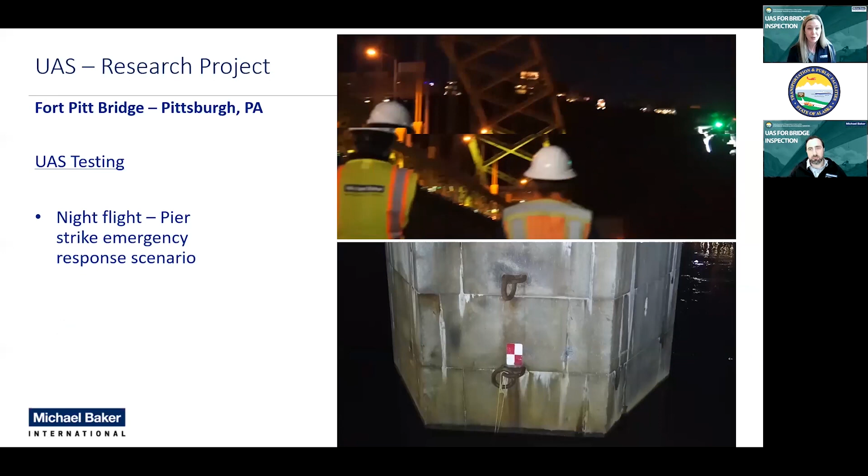And then we also did night flights here, and we tested the same three. We had a little bit easier takeoff and landing. In these scenarios, you kind of have to make it work. We took off from a construction site that happened to be downed next to Neville Island Bridge, and we had to hike it to get there. In this case, we had a nice park that let us fly from the sidewalk there.

And this video is extremely clear. Again, these are the DJI products, depending on how you feel about those. They got great results for us. I believe this one was the Phantom 4 as well, but very, very clear right along the water line there. I am going to skip ahead so you can see what it looks like up at the top. If there were to be a strike higher up, this was very clear video. I hope that's coming across on your side of the screen, not too choppy for you, but okay, good.

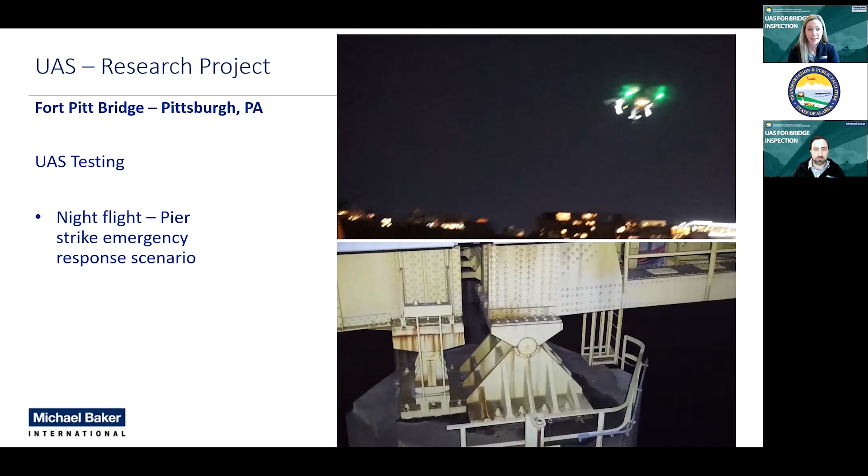We had some great results here, and they were very pleased with it. We also had some of the pilots from PennDOT shadow us during all of this, and we got to share a lot of our procedures and things like that with them.

So that's where those megapixels come into play. At high resolution, you need to be close, yes, but if you can't be close, then what UAS may be best for you. So we gave them a couple of different scenarios based on all of the testing that we did.

And then to wrap it up here, we talk about group exchanges like this, peer exchanges like this, and how we can advance the industry so more and more people are comfortable using this technology. Like I said, we use it every chance we get. We incorporate it into those workflows because we now have the experience to understand where we're going to get reliable results and where it's not the right fit.

With Connecticut DOT, we had an opportunity with them to do some high mast light inspections and contribute to writing their standard operating procedures for those out into the future. It was a great experience for us and them.

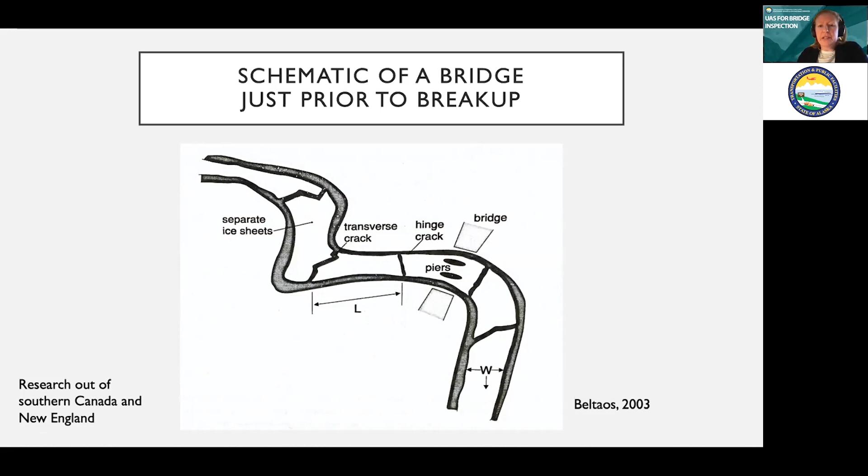We think there's some other things going on, and that's not a lot of information in the published literature, but something that can be pretty impactful in Alaska.

This is a groundwater process in what should have been the dead of winter. There is no superficial melting at this season, so this is in the far north of Alaska, but a process that we don't know very much about.

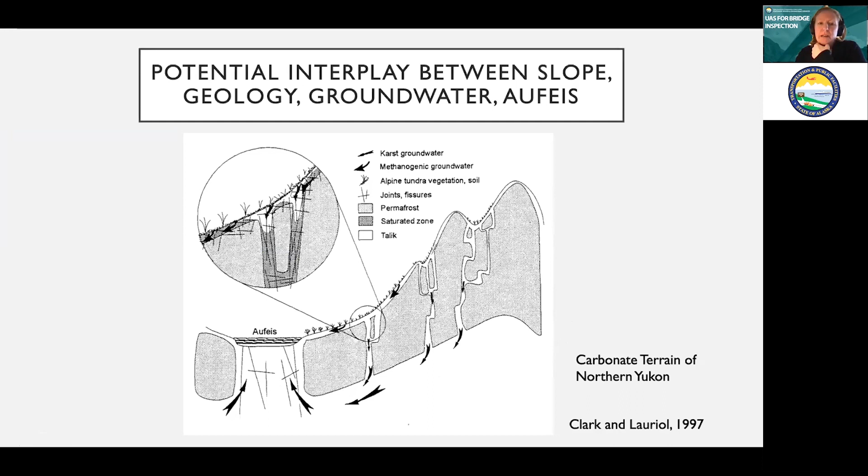Not a ton of research out there, but the thinking is, and this is from a study done in northern Canada, that the topography where you have slopes and recharge regions, percolation of groundwater, and then the riverbed that is getting forced up and helping drive groundwater base flow through winter, leads to the formation of these icings.

So people have kind of interchangeably used this term aufeis and overflow. If you live in Alaska, you're pretty familiar with overflow in the cold regions, which is related, but doesn't necessarily form these laminations, or once it does, you might call that aufeis.

But other interactions with groundwater and ice in cold weather: as ice thickens, the channel under the ice becomes constricted. Another process we see in the northern parts of Alaska is the formation of anchor ice and frazil, things formed in the subsurface that sink and get very sticky. That sticky ice can actually adhere to the structures and might be part of what is generating bridge structure, groundwater interaction. Water pressure may also build, forcing water up through the cracks to the surface in those constricted areas.

In warmer weather, there can be a higher rate of water flow as you start to get melt that is going to increase water pressure in narrow channels, again causing groundwater to push up through cracks and form water on top of the ice, which then refreezes.

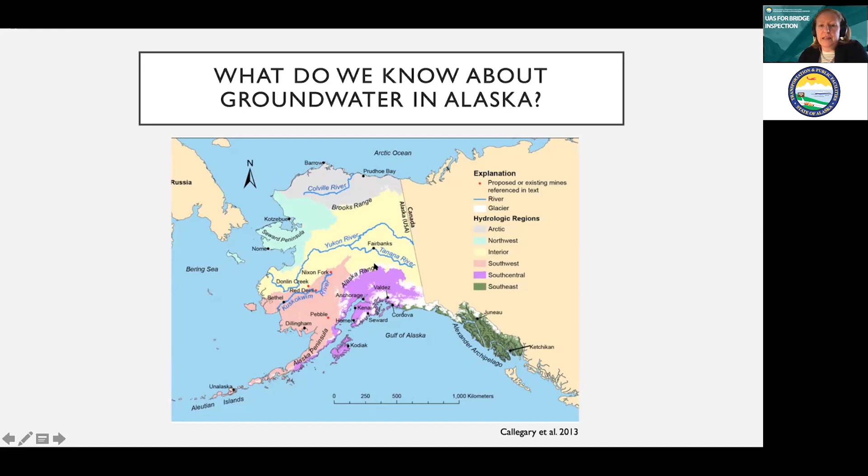We don't know very much about groundwater in Alaska - there's very little direct observation. We know there are different hydrologic regions in the state driven by different climate regions. The case example I'll talk about is at the interface of south central and interior Alaska. We also have permafrost throughout much of the northern part of the state. This area is the interface between discontinuous permafrost with unconsolidated groundwater, and more continuous alpine permafrost in the Alaska range.

This is the last slide on groundwater, but other factors to consider are that much of Alaska was glaciated, so we have some sense of where the maximum glacial extents were - this impacts the hydrogeology. There was also a refugium, an area of the state not thoroughly glaciated during that period, even though some of that is alpine. So all that impacts where the groundwater is and how it interacts with structures. If I sound like a professor lecturing, I just wanted to give some background.

So, to our drone work - we're using a few different platforms. We started this in 2019, and Skydios were still pretty hard to get a hold of, so we chose a Mavic 2 Pro Zoom. We also went with the smart controller, thinking it would be less susceptible to battery draining during cold operations because it's larger than a phone, has its own internal batteries, and holds a charge much longer than the phone in our experience. So that's been interesting.

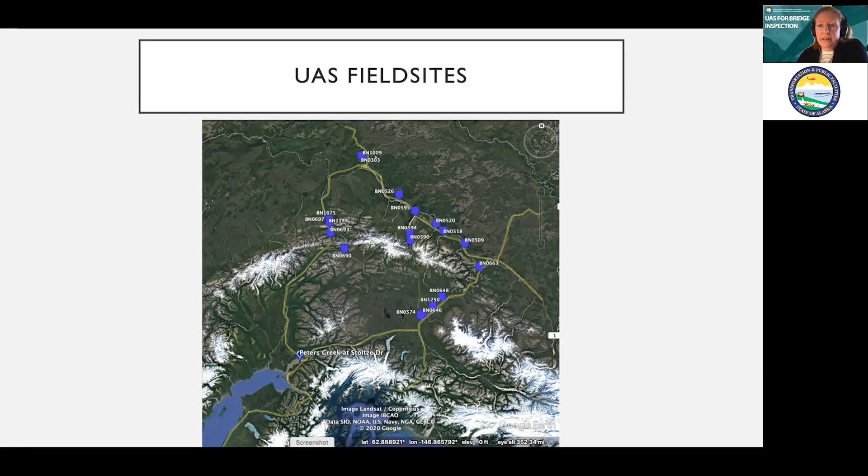Limited light is another logistics concern in Alaska, limited daytime. The crewed aircraft logistics are a little different. We based these flights out of Fairbanks, where we had fuel, and in the first couple years we had some hangar access.

As we flew these routes, we'd do the whole route within about a day and a half. One day would be spent going down the Parks Highway, cutting over the Denali Highway, and then over the Richardson Highway, refuel at Gulkana, and then through these other routes through the mountains.

Other logistics: with the crewed aircraft with hangar access, we were fine taking off at 30 below on the ground in winter because the aircraft had been warmed. Once you get up to altitude, there's typically an atmospheric inversion in Alaska, so air temperatures might be 20 degrees at altitude even though it's very cold on the ground. Not a big deal.

Do I want to fly an uncrewed plane at 30 below? No. So our cutoff temperatures for that were 5 to 10 degrees. We did have some problems at 10. Of course, 15 to 20 degrees Fahrenheit is a much safer low point.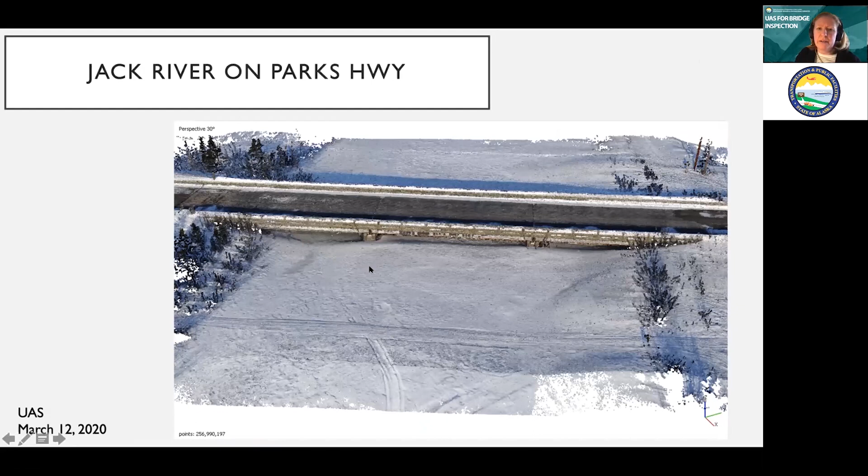This is also from UAS. You can get close to that 400-foot maximum, but we can generate these orthomosaics from the UAS as well. The advantage, without some exciting flying in a crewed aircraft, is we can see more under the bridge. This is a point cloud from the March dataset, showing a bigger picture of the lack of snow deposition under the bridge.

In the last few photos, I'll show the results from a month later, April of last year. This is the GoPro footage. You can see the distortions of the fisheye lens, but also some interesting features. I pulled out a couple of shots showing actual holes in the ice where groundwater is actively percolating up right at the piers of this bridge, as the ice is ripening.

Here's another view. Again, right over the structure, you have ice failing with cracks, just like we've seen in the literature about dynamic breakup processes. But there are also holes in the ice where, if I were showing video, you could see the groundwater actively percolating up. Is the bridge structure causing that groundwater to upwell? You can look at correlation, but not causation, but I think that's kind of compelling.

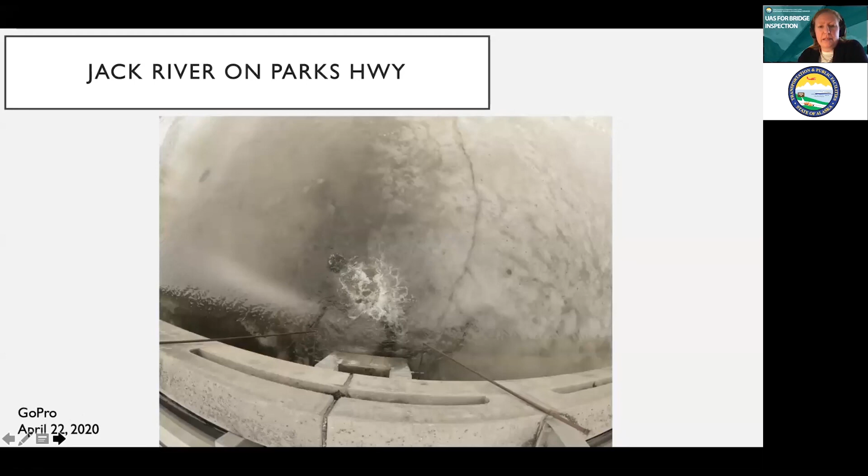Here we go, get a sense of what's driving that right at the pier during breakup. All right, I think those are the pictures I wanted to show you today as an intro to our project. Thanks.

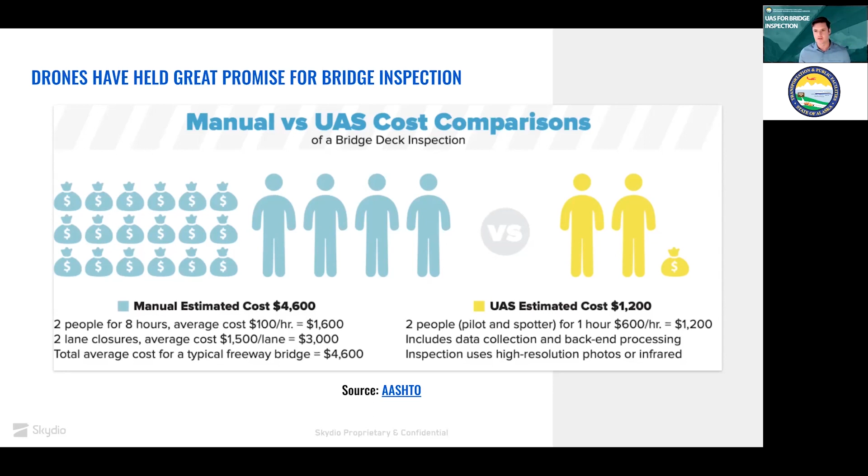We all know the promise drones have offered, and we've discussed some of the realization of that promise. AASHTO in 2019 did what I think is the seminal study showcasing the benefit: half the cost, using half the amount of people, for the prototypical freeway bridge inspection. This is something we've seen at Skydio. We've had a lot of organic traction among the bridge inspection community, not just here but increasingly around the world, and we've started to focus on serving this market because we see the positive environmental impact, benefits to worker safety, and of course ROI and efficiency. The issue is, for many programs we talk to every day, this has seemed like a pipe dream for two reasons: technology and regulation.

We've talked about the limits of technology here today already. Good luck flying a drone that requires GPS under a bridge—not going to go well. Good luck taking off next to metal struts and railings if your drone doesn't like electromagnetic interference—I hope that works out for you, because it's not going to. We have the benefit of producing products that don't need GPS and aren't subject to EMI, and that has turned out to have lots of benefits in this very unique and very important inspection context.

The regulatory front is really the barrier people are now beginning to run headlong into. To inspect below the bridge deck, you're typically standing on the deck and can't see the drone, which means you need a waiver. That hasn't been easy to get. Fewer than 70 beyond visual line of sight waivers have ever been granted by the FAA out of more than 3,000 applications. Even if you got it, you'd likely need visual observers, potentially a $100,000 radar system, and you'd be limited to beyond visual line of sight flights at only one or two sites. That doesn't really help.

So at Skydio, we've been focused on trying to smash through those barriers, working in lockstep with the FAA. We're in the middle of a seismic shift that really helps knock down the doors we just mentioned on technology and regulation.

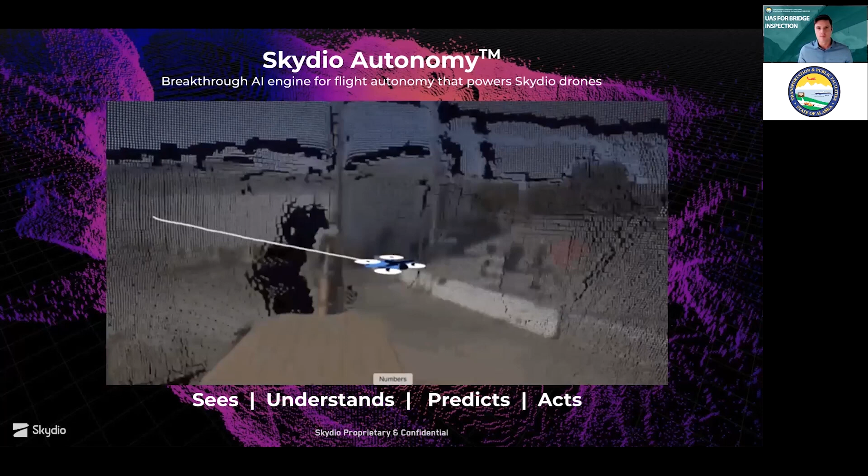When we talk about autonomy, we don't mean what I like to call 'fauxtonomy,' a fake autonomy. Autonomy means you have a device that is thinking for itself, seeing for itself, and making intelligent decisions for itself. That's what Skydio builds. Our founders have been working on this technology for about 12 years. They met as grad students at MIT, where they pioneered a lot of the fundamental technology here.

I would show you what this looks like in the bridge inspection context, but you've already seen this because our friend Barrett at Collins Engineers already showed this video. It's actually a Collins video, so you've seen the utility of Skydio in the bridge inspection context.

So who are we? We're now the largest US drone manufacturer. We're really proud to make thousands of Skydio drones a month in the US, and we design, produce, and support all of our products here. We're also a trusted partner to the Defense Department due to our high levels of cybersecurity and supply chain security.

You've heard about the Skydio 2 on the left, really our prosumer device, which has a lot of enterprise functionality. On the right is the X2, the enterprise bigger brother, if you will, older sister. It's more rugged, flies a little further. It has a 12 megapixel camera with exceptional levels of GSD, as well as a FLIR Boson 320 thermal camera, giving a lot of extra functionality especially in the inspection context. It flies at night, has about 35 minutes of flight time, and about a 4-mile range.

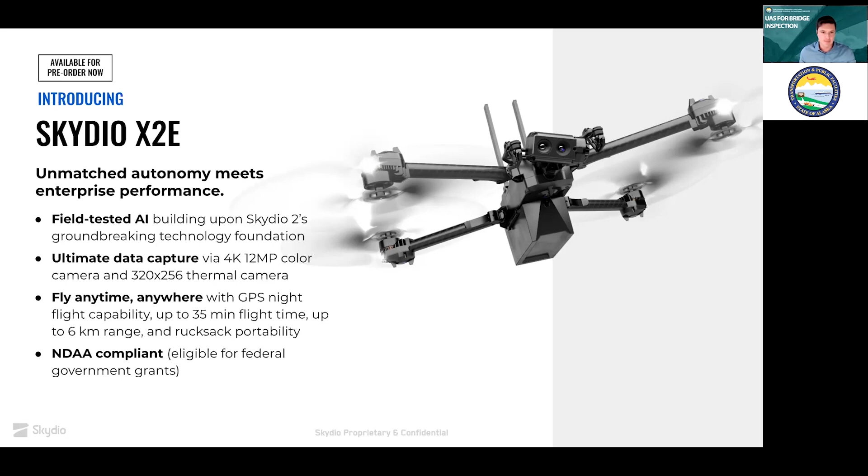Importantly, in the world of federal grants, the Skydio X2 is eligible because we are NDAA compliant based on a high level of supply chain security. That's now a requirement, at least for the Department of Defense, and actually for every other federal agency grant, courtesy of a recent executive order that came down somewhat unexpectedly earlier this month.

You've also heard mentioned today the software skills that Skydio can add on. Once you have an autonomous platform at the foundational level, you can layer on software as a skill on top of that. One of those is called the Autonomy Enterprise Foundation. I won't discuss this in detail, other than to say part of the reason we came up with this was after countless conversations with people using Skydios and DJI and other drones to inspect bridges.

We realized that through software we could enable advanced skills like close proximity obstacle avoidance to reduce that bubble around the drone. Skydios have 6 navigation cameras that see the world in every direction and create a 3D map in real time. It's not some sort of gimmick, it's not a post-processing tool. The drone is always, always, always flying itself.

You can manually fly it, but the drone at its core is always flying itself. It knows where it is a lot better than you do as the pilot. It knows where obstacles are a lot better than you do as the pilot. That's really the trick that makes it useful.

Of course, the gimbal can go all the way up. That's another feature we knew we needed after talking with the bridge inspection community, as well as the ability to zoom all the way out and see the entire world in every direction. That's a unique feature we can do because we have 7 cameras: 1 EO front-facing camera, and 6 navigation cameras with overlapping 200-degree 4K fisheye coverage.

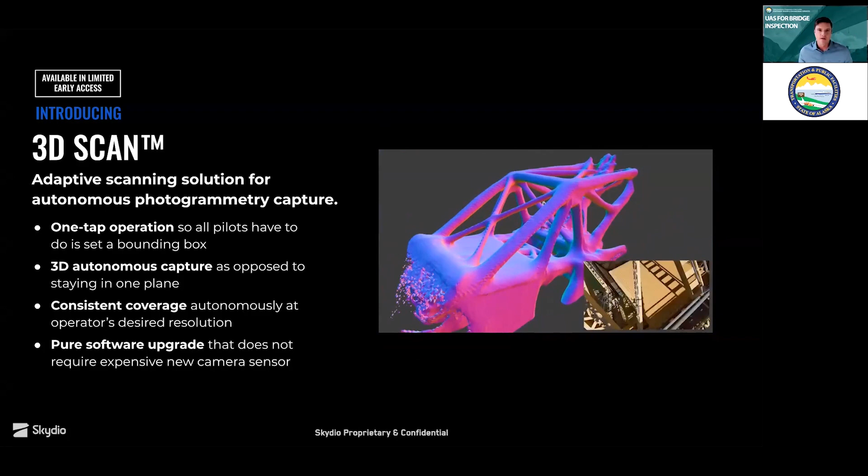So one thing we're most excited about, there's been a lot of discussion in this conference about mapping. We are unbelievably excited about mapping, and we're just about to release a new software product called 3D Scan that automates the process of inspecting and building a photogrammetric map of any asset, any structure, including a bridge, without any input from a human pilot and without any knowledge of that structure before you begin the scan.

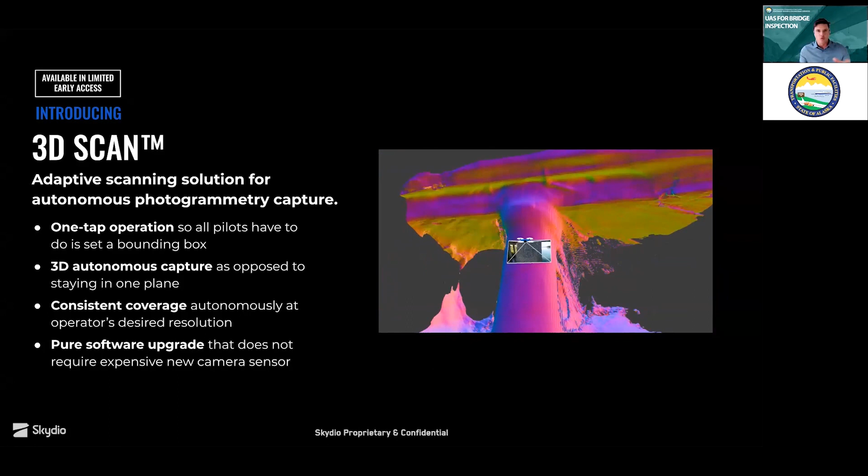This video I'm showing doesn't really do it justice. You honestly need to see it to believe it, but the drone uses its computer vision and deep neural networks to map a structure. Literally all the human pilot does is push a button that says take off, then select the structure with two fingers. The drone then goes to town, conducts an initial scanning route, decides where it needs to take pictures to build a brilliant, beautiful, dependable 3D map. And then it takes all the pictures itself, flying itself in acrobatic, Olympic-style flying if it needs to, in and out of the structure.

I know it was mentioned that some folks have spent 2, 3, 4 days taking the photos necessary to build maps. That's the way this works right now. At Skydio, we can map bridges with 3D Scan, oftentimes in 30 minutes to an hour. And when I say we, I mean the drone. The pilot is just standing there watching the operation. That's what the future looks like, but it's not really the future. It's the present, and we've done this before.

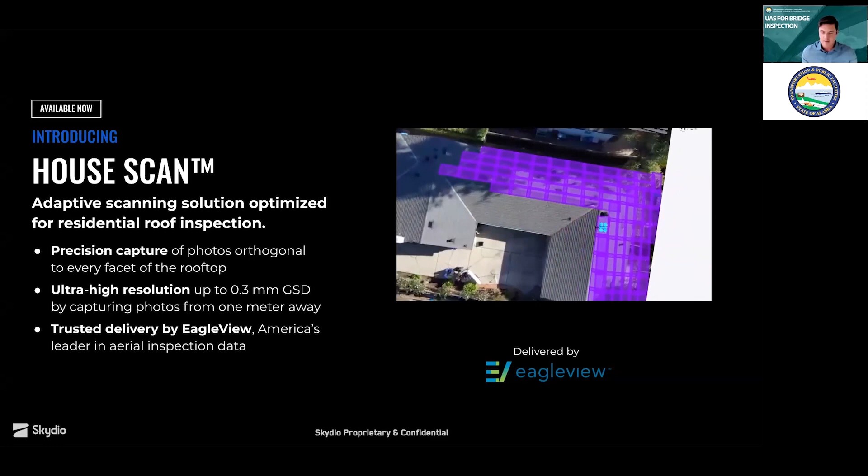So last year we released a product called House Scan. It does exactly that for residential roofs. This isn't an R&D project. It's actually the largest commercial drone deal in the history of drones, period, with our partner EagleView. So it's the same product that allows you to autonomously inspect and then use AI on the back end to do change detection on residential roofs.

EagleView, our partner, has done more than 1,000 scans using this product all over the United States. Profoundly useful, especially for disaster relief. So again, when we talk about automated photogrammetry, it's not something we just think about. We've actually done that and delivered it.

We're also really excited that we're going to release in short order the Skydio Dock. This is a house in which our autonomous drones will live and take off. You could imagine putting this next to a bridge that you know needs special attention. And that way you can inspect the bridge anytime, day or night, using the Skydio X2, for instance. Really a groundbreaking step forward there.

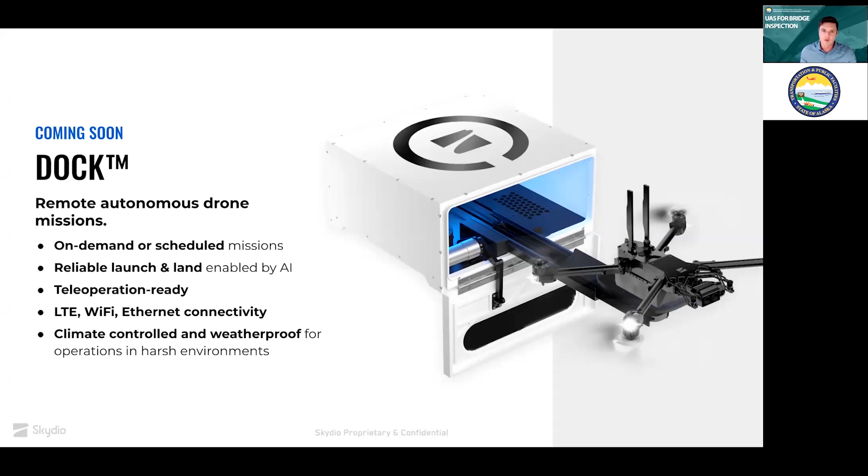There are other drone companies working on docks too, which we think is really exciting, definitely where the industry is going. So now let's spend a minute or two thinking together about how we can work with the FAA to make these inspections much more efficient. And the way to do that, we think, is to focus on a concept we call close proximity, low altitude operations. People have been focused for years in the industry on flying as high as they can and as far as they can.

That's great. Some people need to do that if you're delivering burritos or pizza. But most of us doing industrial inspections—and I'm a former operator who ran a huge nationwide drone program at DOJ—we just need to fly beyond line of sight and behind obstructions. So that concept where you really limit the air risk and the ground risk is something the FAA is beginning to accept. But if you're going to do that, you obviously need a tool that can fly competently in tight and confined spaces close to infrastructure. Now at Skydio, we've had a lot of success, luckily, and really this is a compliment to our partners and customers, breaking down some of these doors.

So The Verge and others have said the FAA has these rules, but maybe those rules are written for dumber drones - that's The Verge saying that, not me. And maybe if you have a smarter drone, the FAA is more likely to let you walk through some of those forbidden doors in the past.

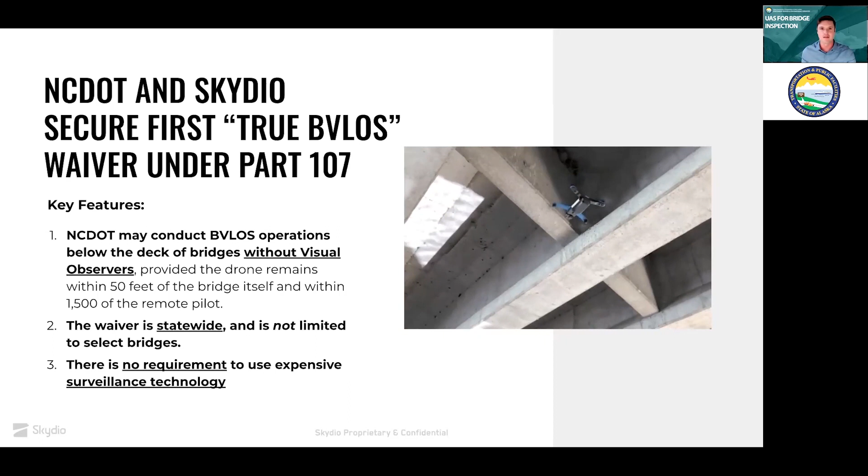Usually beyond visual line of sight waivers require visual observers. This was the first, or one of the first, that did not require visual observers, in part due to the power of Skydio autonomy. So the FAA trusted that our drone wasn't going to crash into the pylons that uphold the bridge. It's also one of the first statewide waivers - not geographically limited. Really astonishing in scope.

Here's what it looks like. If you're the bridge inspector, you can just imagine how happy this makes you, because you can sit comfortably on the deck once it's closed to traffic. That's part of the regime that North Carolina and Skydio agreed to, at least in the beginning phase. And you can fly all the way down to the bottom of the structure, within 50 feet of the bridge and within 1,500 feet of the operator.

So really an extraordinarily strong step forward. A lot of safety wins for the operators - they're very happy because they have a lot less trouble. They can actually do multiple inspections, sometimes in a single day. And of course, it makes it easier if you're looking to insource your drone program, if you have that regulatory foundation that makes it scalable and safe.

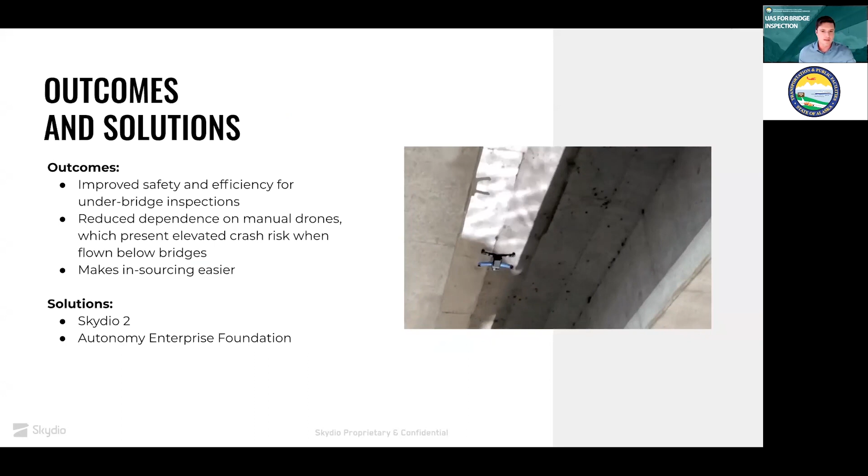We don't have much time to talk about the safety case - happy to talk about that offline with folks and work through that. This isn't a trade secret necessarily. We love to share information and share the lessons we've learned in trying to be a real leader here.

One thing I'd leave you with is, if you're going to do this yourself, there are really 3 T's you should think about. Obviously, your technology matters with the FAA, and for these close proximity operations, the more autonomy you have, the better. Training is also really important - even when using an autonomous drone, the FAA wants that extra measure of training. And on the tactical front, emphasize infrastructure masking, that principle that reduces, if not eliminates, air risk, and also work with a program, be it Skydio or someone else, that has a lot of regulatory expertise, so you get this right and don't spin wheels with the FAA, which is very much easy to do.